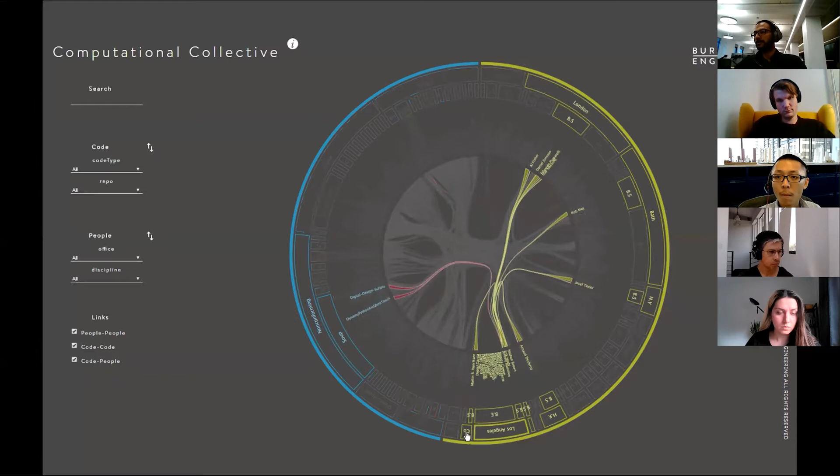So a bit of proof of concept here of connecting everyone to everything. On the right side, you'll see individuals who have contributed code to BHoM. Those are within Buro Happold and also outside of Buro Happold. And on the left side in blue, you'll see the packages of code that they've contributed to through our toolkits. So it really is a kind of nebulous form of individuals contributing to code back and forth.

Our code development metrics, this is a little bit out of date. We had 81 contributors to our open source code, which is a bit unprecedented, 120 repositories, and over 500,000 lines of code in total. I know this number has gone up significantly since then, but just a little bit of a peek into how collaborative BHoM is.

And a bit of foundational concepts here to cover. It's BHoM, so of course there's an object model behind this. So we have got discipline representations of those objects. We also have our adapters, of course, connecting different software packages together, and the engine, what you do with those objects. So a bit of how we've structured our oM.

It's defining the elements we use every day on our projects in the way that we as the experts understand them. I know a duct very well because I'm a mechanical engineer. I would have no business defining a beam. However, there are concepts that relate between the two of them, such as that you would have a start node and an end node, and maybe a center or radius, something like that.

So here we've got a circle, which would be defined with a centre. Please do not mind the British spelling here. You'll see it all over the code in BHoM. So we've got the centre, the normal, and the radius. You, of course, have a radius and not a diameter because you're defining it by a single property, not ones that conflict with each other. And all of the derived properties, something like a diameter, would come in the engine method. So we've decoupled those two.

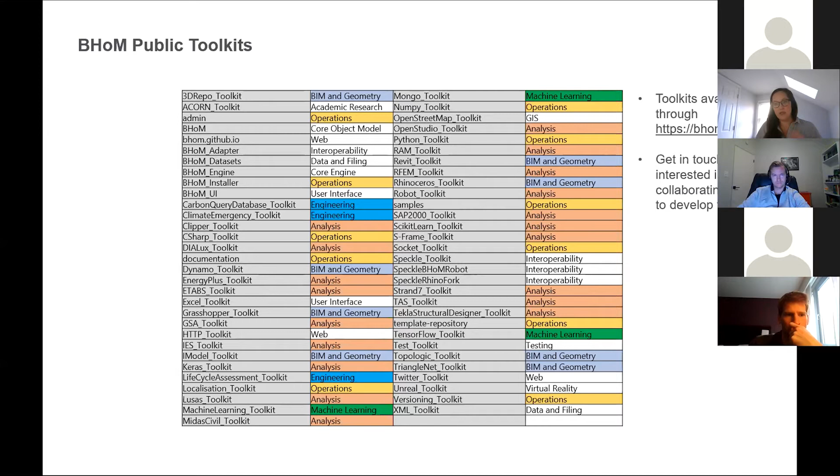We also have some closed source toolkits. Those are things we either just use internally or don't think are that important for external use. However, we're always open to moving those across. So if there's something you see that's interesting, let us know.

Here we've got our different packages. We've got 36 open source adapters to different software packages. You can see them all laid out here. So everything from Revit, Rhino, Twitter even to data mine there. LUSAS, which is used for bridges, lots of structural adapters here, Energy Plus, IES, TAS, all that good stuff.

So BHoM loves flow-based or visual programming. All of our user interface has been taken from the software that we already use to do visual programming. That's a nice way to interact with the code that's been built. So once you write a function within BHoM, it automatically appears within Grasshopper, Excel, and Dynamo. You might be asking why Excel? Lots of people love Excel, and we believe in using the right tool for the right job.

So if you look within Excel, it's better for more like data operations, and we'll see that through the demos here. But of course, Grasshopper and Dynamo being the flavor that we love within AEC for visual programming. So you'll see that everything has a lot of parity between the three interfaces. You can see here exactly what they look like within each of those three interfaces. We are open to expanding this to other interfaces if something comes up. Again, it would just be another toolkit.

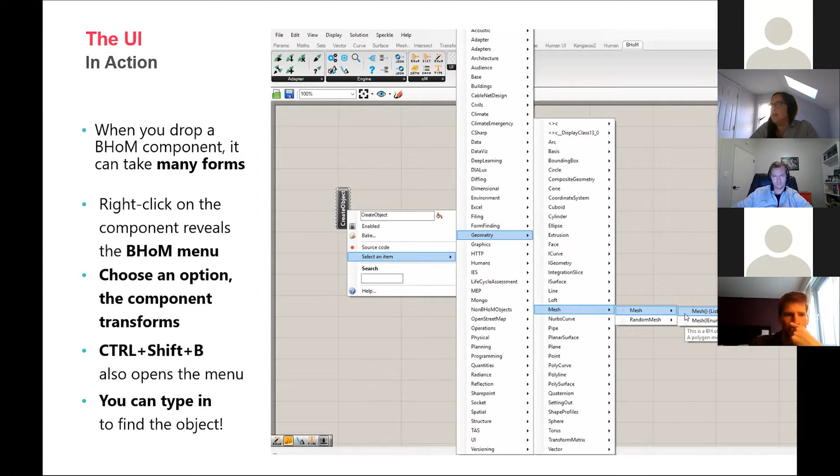You can select a specific geometry representation here. In this case, we would select a mesh. We see that the component pops up here. However, you can also go through and just search for a component by name. You can also hit Control-Shift-B, and that allows you to search for anything within BHoM. So that's another quick tip there.

So Eric's going to be going through some examples of how we have utilized BHoM. Thanks, Kayleigh. So just touching on a few ways that we use this in our workflows and how this affects the way that we describe objects and send objects to and from each other. The first example we're looking at here is a pretty standardized workflow that we're using now on quite a few projects, looking at transdisciplinary design and what we call rapid prototyping. We're literally looking at how we rebrand this, because we feel like that's not really the best phrase for it. So hopefully next time you see something like this, we'll have a zingier sounding word to describe it.

But essentially, this is something that a lot of people in the AEC industry have been looking at, which is early on when we have something like a massing, how do we efficiently derive all the different bits and pieces that that massing leads to for each different discipline? It's pretty typical in our industry, we'll see Grasshopper scripts to take a massing and do X, Y, and Z in order to get windows out for facades or to get the mechanical routing for some kind of early calculations. Maybe you're going into Ladybug for those calculations.

And rapid prototyping is how we use the BHoM to define all these things in a common framework where once we have that massing, we know that we can describe the building in all those different ways that the diagram Kayleigh showed in the beginning is starting to touch on. And by doing that, we're able to really quickly connect all the different disciplines to their source of truth, feed those through analysis, and then really quickly get answers back. So this means at early stage, we can get a wide range of designs and get good information on the key metrics for those designs for all the different disciplines involved.

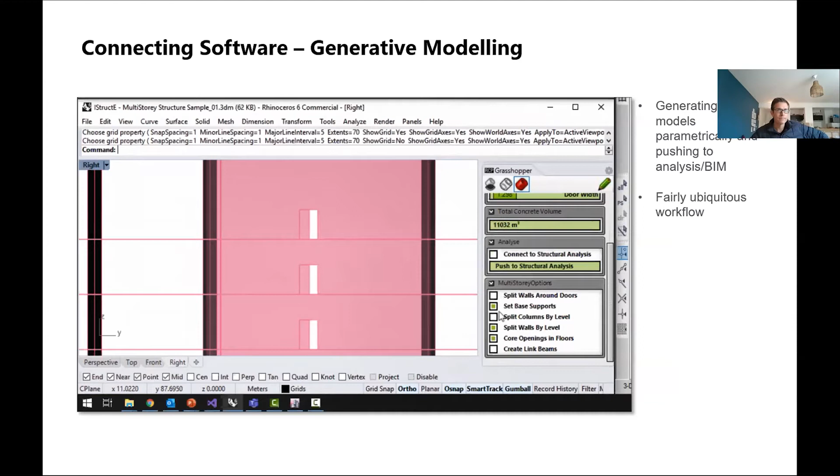Another option that we use the BHoM quite a bit for, and that I think most people get a lot of value out of, is looking at things like generative modeling. So if we need to create geometry, being able to create geometry from our primitive information into proper BHoM information. These are data-rich objects. These aren't just flat geometry. So these data-rich objects then can be sent between different platforms that depend on that data.

They also can be sent between the analysis into something like Revit with all that data still maintained, that obviously then feeds into things like documentation. It's just a really handy way for us to generate geometry with data that's critical to our workflows and that we can send between different software that depends on that data.

And then expanding on that, here you can see a similar example to the last video, but with Excel. So simplifying workflows to be able to cater to different processes on different projects. In this case, using Excel to just enter in some key coordinates and quickly prototype out a multi-story building layout. So the one shown here is just a demo, but this is a really handy tool to have when you're early on with an architect and you want to explore different solutions.

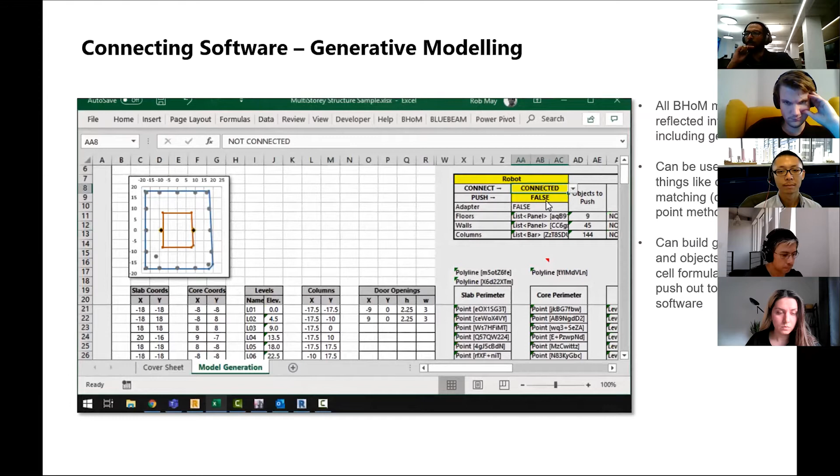And maybe it's not even just a matter of they're giving you a bunch of different masses. You're having more of a dialogue of laying out the structure and the general massing in order to understand how that relates to structural performance, member sizes, things like that. So you can see in this example here, we're starting with just a few points that are entered into Excel, and from there generating all of our slabs, our typical shear wall layouts, running that through analysis, and then that can be fed to whatever analysis platform we prefer, and can also then be sent to somewhere like Revit.

I think the key thing here too with the BHoM is we're not tied to specific platforms. So we found, especially being a global practice with a lot of different regions, with a lot of different codes that they're required to design to, a lot of different software that's either kind of blackballed in certain areas or really preferred in certain areas. This flexibility to say we have the same model description and we can then just send it to whichever analysis we prefer and get the same consistent result out is really powerful for us.

So, if we need to use ETABS, we can use ETABS. If we need to use Robot, we can use Robot. And we're not going through the process of tweaking a bunch of information to make it Robot ready. Since it's described in the BHoM and the adapters handle those conversions in a consistent manner, we can consistently create that same analysis model in whichever platform we prefer.

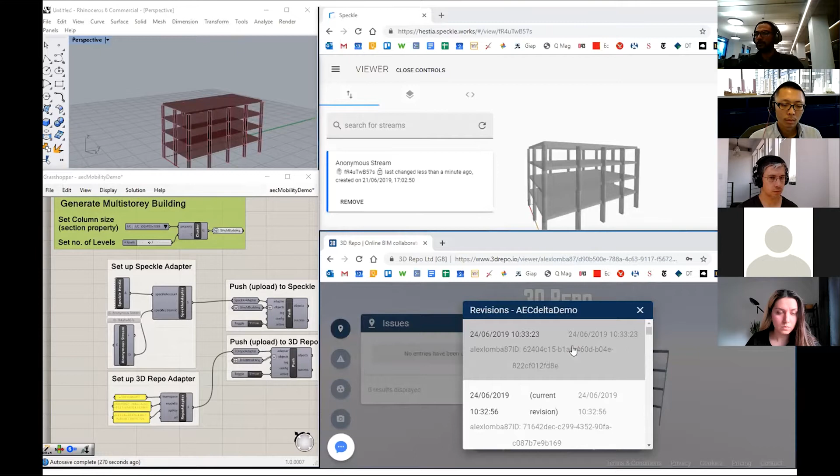We're also now looking at how we leverage web-based platforms more going forward. So among other things, we're working now on support for Blazor and direct integration between Blazor and the BHoM code base, which is also in C#. So really exciting development as far as getting us closer to direct web-based development. We're not really sure where that'll lead yet, but the fact that we can have our native BHoM objects described in a web-friendly platform that's ready to deploy, we think there's a lot of potential there. So we're really excited to see what comes out of that as well.

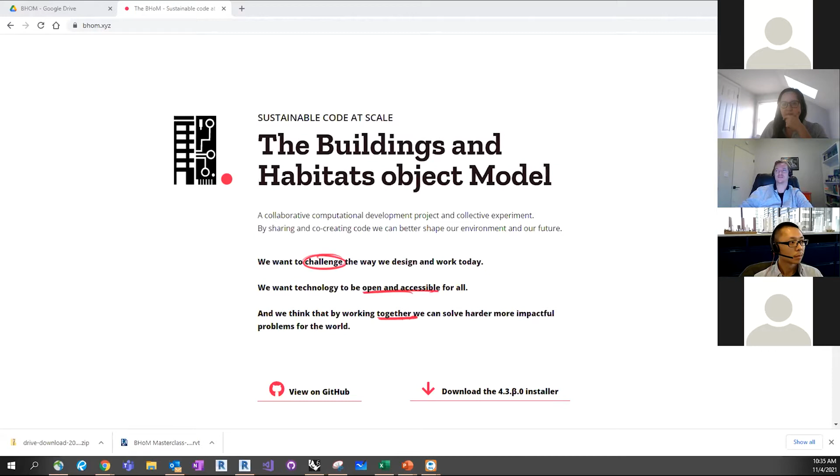So when you install this, it'll plug into Rhino and Revit. So just download the installer, get that installed, and then download all of the files in the Google Drive. That includes your scripts, so you'll see a few Grasshopper files, a couple Excel files, which have the script logic contained within them for reading in BHoM objects and doing things with them. And then some base files as well, so you'll see a base Revit model, Revit version 2020, by the way, that we can use for testing pushing objects to Revit, and we're going to be using that for the room interop as well.

With that, it looks like Kayleigh's back, so Kayleigh, back to you. Hey, I could hear you the whole time.

Thanks for picking up. So in terms of following along, does everyone feel a little bit more comfortable with that?

Yeah, I think I'm going to try following along, at least initially. Cool. Quick question on the Revit version there, Eric or Kayleigh. You said Revit 2020, and I do have that version, but I'm wondering with really subtle differences in the APIs and stuff, does it auto-detect what version Revit file it's connected to, depending on the plugins, I'm guessing? Or I'm just curious.

So we've set it up so that we have specific deployables for each Revit version. So it's fully supported for, I believe, 2018 through 22 at the moment. But essentially you don't have to worry about which version you're pushing to. Revit Toolkit will take care of that. So no matter what, if you're pushing to 2019 or 2021, that doesn't change your script at all. It doesn't change anything about what you're doing.

When you do the push, if you're connecting to a 2019 version, it'll push to 2019. If you're doing 21, it'll connect to 21. Each of those DLLs are essentially referring to the specific API of that version. Perfect, sounds good. Yeah. You won't notice any changes based on using a different Revit version. It all looks the same. But the adapter was just updated to support 2022 as well. Perfect.

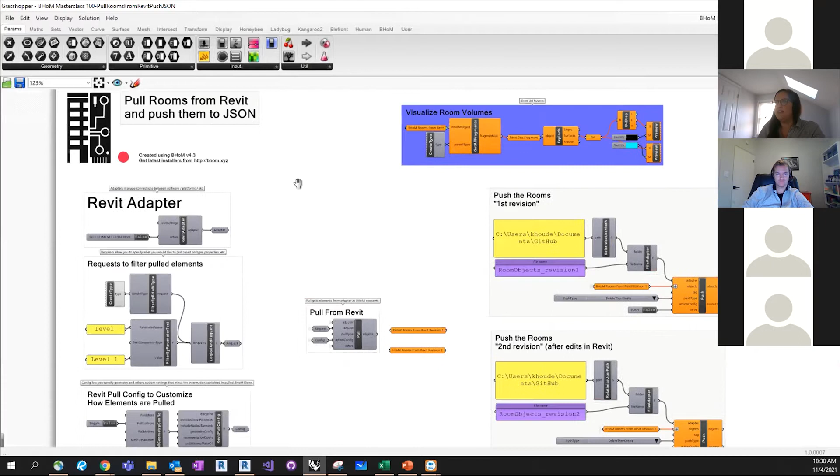So you can see here that we've got our little heading here to pull rooms from Revit, push them to JSON. It's created using BHoM version 4.3, which all of you should have downloaded from the BHoM.xyz site. We can see first thing on the page here is that we've got our Revit adapter set up. That's where we're going to be pulling from. So of course, that's where we start off.

You can see that there is a Revit settings portion. You can set this up to look however you want. There are different discipline orientations for that if you needed to use it. I hardly ever use that function. Mostly just telling that specific adapter, which comes from up here. So if you go to this little plug button for create adapter, you'd be able to pull that down.

Right click, just like you did in all the other videos, select an item. You can see all of the open source adapters to different software packages here. You can come over to Revit adapter and place that component down. We already did that for you ahead of time. So I'm going to delete that component.

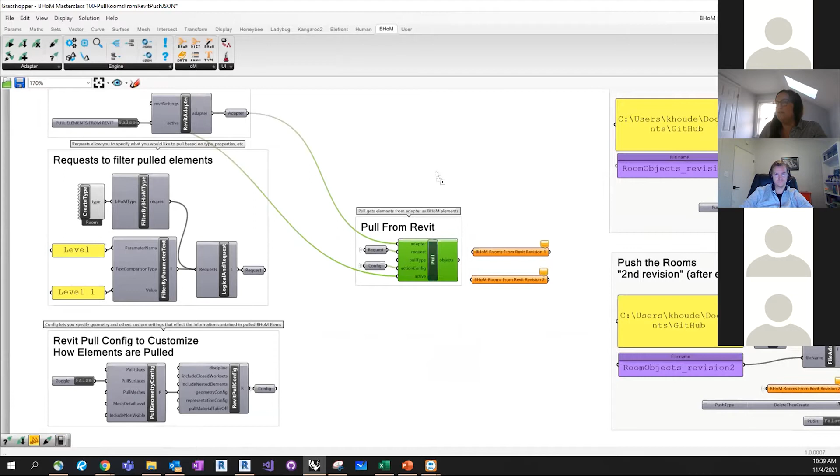We can see that if we're looking at the pull, which is this component up here under the adapter with the little arrow, this pull component is saying which adapter are you using, which software are you pulling from. Request meaning what are you trying to pull. The pull type can be specified again for that specific thing. Action configs are used for different adapters as well. There are some that are specific to different adapters. And then active, should I be pulling or not?

So we'll see that that's already set up here. We've got our adapter plugged in from Revit. You'll see lots of these little repeater things if you're not a frequent Grasshopper user. If you just double click and you type in BHoM object, you'll see that those pop up here. We like to use these little containers for internalizing objects so that we can pass scripts between each other without having to reopen Revit or SAP or wherever you're getting objects from.

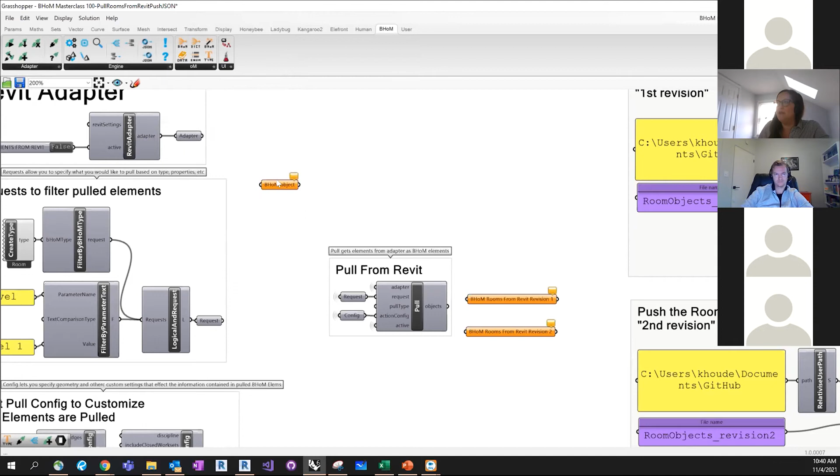So you'll see lots of those floating around on the page. Also just a workflow of keeping your script really tidy. It's always easier to work together if you're being clean. So the specific request that we're doing here is over in this area. In this case, we're telling it to pull all of the room objects, so filter by BHoM type, as well as the level that they should be coming from.

You don't have to set it up this specifically, but this is just showing that you can use logical and types of requests to pull only specific items rather than eating the elephant of 5,000 rooms within your project. You can break it down a little bit. You can also filter by selection, so just selecting a couple of things. You can also just go ahead and plug this type right in here to the request.

So types are probably the easiest way to work with in BHoM. So you could just plug that in there, but we'll keep it as it is here for now. So you see that request is set up there. There is no pull type specified for this, which is perfectly fine. You don't have to have that. We did set a pull config option.

So these are kind of neat because they allow you to have different permutations of visibility of things. So you can choose a specific discipline permutation of that, including closed worksets, including nested elements. You can also look at the geometry in different ways if you want to. So you can pull edges, surfaces, meshes, anything you really want. It supports lots of the different objects within Revit. So that will allow those to be visible within Rhino.

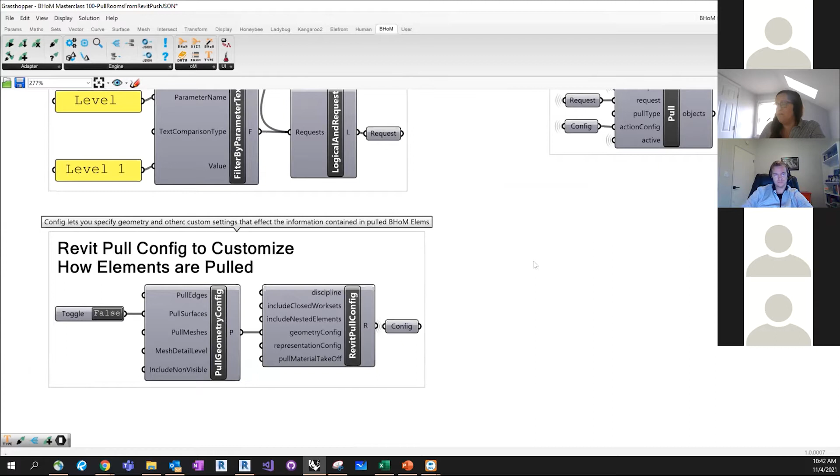If you didn't set this, you'd be able to see like the perimeters of the rooms. However, pulling surfaces lets you see the whole thing in 3D in the Rhino space, not the Revit space. So we see that that config is set up. And then last but not least, the active component, which allows us to pull those objects here. So without further ado, we are going to just go ahead and pull those objects. I'm going to set this from false to true. And this is using the Boolean toggle function within Grasshopper.

All right, so what is it saying to me? It is saying, failed to connect to Revit. Whoops, Kayleigh forgot the first step here. If you go over to BHoM within Revit, you need to activate it. So I did that on purpose, obviously. So I'm going to go to the BHoM tab in my Revit screen here and click Activate.

Since we are all sadists and love having tons of different Revit versions open, you have the option of updating ports here. If you have 10 versions of Revit open, which probably drives your IT department nuts with licenses, you can set the ports on here. If you just have one version open, or just one that's active, don't worry about it. But if you're pulling and pushing between different Revit models, you can set ports on them. So don't worry about that right now, since these are the default port numbers.

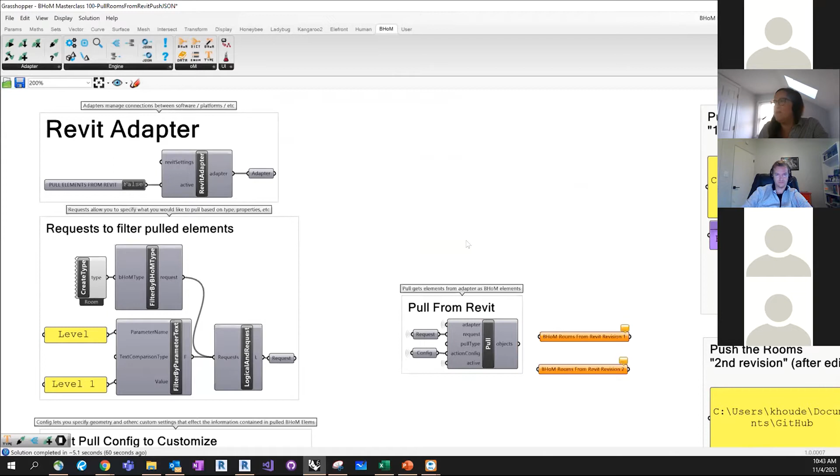So here we've got that activated now. I'm just going to set that back to false and then true, and it should pull my Revit rooms across. Whoops, I forgot to change it. Any questions on pulling? All right. Mine still says failed. Just change it from false to true again. Okay. And let me know if it still has issues.

Got it. Cool. Perfect. All right, so we see on the result side of the pull, if you hover over the objects, we see that we've got 18 objects. These are all defined as, I'm going to put a little panel here so we can see them, BH.oM.Architecture.Elements.Room. That's because that's the type that we set up over here. So that is the way that BHoM is viewing those rooms as it pulled it.

You could also pull them as environment spaces if you wanted to. Those have an interchangeable language, but a disciplinary spin on the way the object was defined. So the default here is the architecture elements room. So we see we've got a couple of little containers sitting here. This is the one that I'm going to drop these room objects into. So I'm going to grab from the objects on the pull and drop that into the BHoM rooms from Revit revision 1.

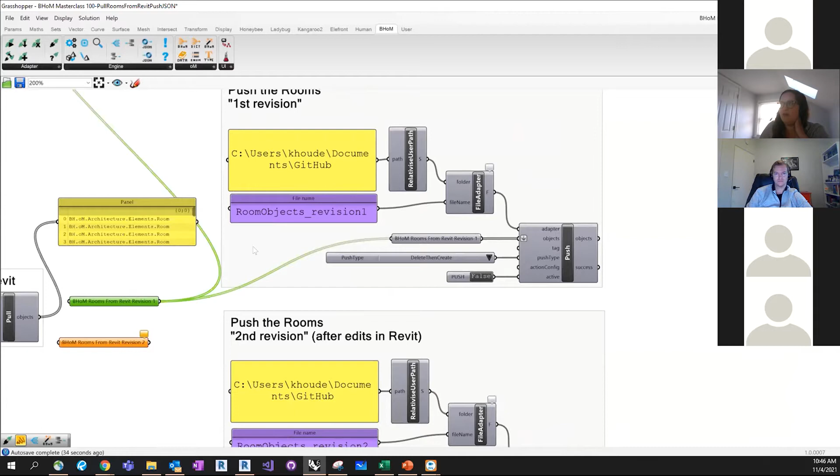So now that I've got these in here, I can also use my handy dandy internalize function and actually keep them inside of the Grasshopper script if I wanted to, so you never have to open up this Revit model again. You can right click and internalize data. It's a nice way to pass scripts between people, so you don't have to open up every model. So we've got those sitting inside of this little container now. We see that those are connected over here to our file adapter push, which is going to push that JSON file across. Do we have any questions before we explore the push?

So essentially, this is just pulling data and then turning them into JSON. This part of the workflow is, yeah.

Got it. So the overall workflow, if we go back to our diagram here, is that we're going to make some changes to these rooms. We're going to change some data about them. We're going to change some geometry. And then we're going to use our diffing engine to figure out what those differences are.

Eric's actually going to pick those up and modify his roof structure as a result later. But within this workflow, we're just going to show how you can push those JSONs along and keep track of your different permutations of a model. So a workflow we really try to get into at BH is keeping track of your different files.

So if you want to say the architect gave me a model on day 1, and then they gave me a model on day 30, and I haven't updated my spaces since then, and I only want to update the ones that have changed, how do I know what to look at? So this allows you to basically diff or find the differences between those different models and look at the data that's changed, look at the geometry that's changed, and then you can decide how to move forward with that.

Another workflow we use this for is our electrical engineers love chasing the mechanical people around for the loads on their mechanical equipment. And they usually get stuck with doing that 2 weeks before the deadline. So they'll say, okay, I did this 2 months ago. I want to know where to look very specifically to see what has changed. So you grab the mechanical equipment from 2 months ago, grab it from today, and you can see the differences.

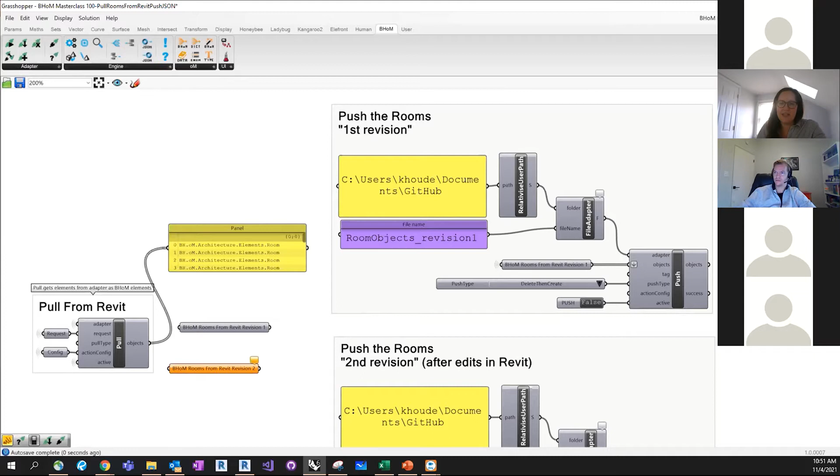Looks very similar to the, is my internet cutting out again, Eric? Can you hear me? Yeah, it did for a second there, but you're good now. Sorry. If it happens again, we might maybe just stop doing your video, but for now, I think you're good. Fair.

Okay, so the push looks very similar to the pull. You're telling things where to go. So first the adapter, then the objects that you want to push. So dissimilar from requesting what to pull, you're telling it what to push with the objects. Then the tag for those objects, if you needed it. A push type is usually a pretty fundamental thing to do. So when you're pushing to Revit, you usually want to do update only.

You can see here that it's the usual kind of CRUD language of creating, updating, deleting. For JSONs, delete and then create is usually the default behavior. You don't want to keep rewriting over those objects that you're pushing. You usually want to just delete then create for a particular file name. And then the active again, in this case setting it to false, so we're not just automatically pushing that JSON.

So for the adapter here, we see that we've got the file adapter. So this is the magic sauce for pushing JSONs within BHoM. You've got the folder path here. So I just have a little panel here describing my GitHub folder where I was pushing these JSONs to. So feel free to, well, or you have to actually, paste your own link there. So any kind of file you have within

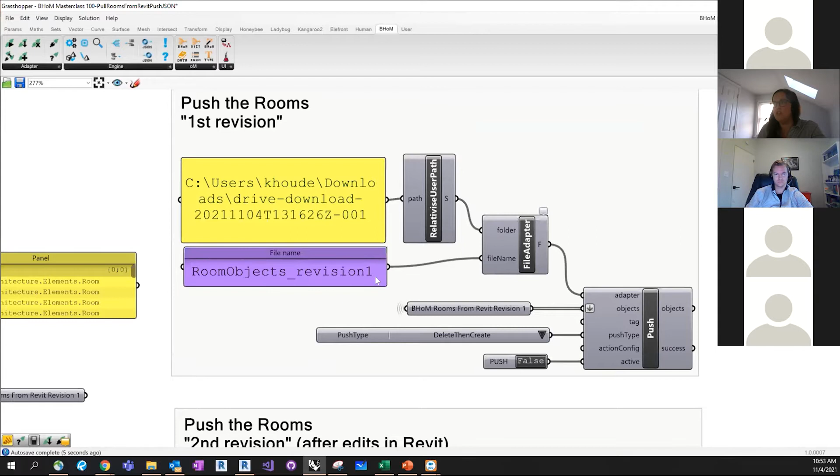Cool. It's all clear. So if we're feeling good about this, we can go ahead and change this to true, and then we should change it back to false so that it remains closed. You'll learn pretty quickly to keep those shut off until you need them, or else you'll keep pushing and pulling things. Live updating, it's kind of like using automatic mode in Dynamo.

So if I go back over to that folder, I see that I've got my room objects underscore revision 1 JSON file sitting there now. So those are actually room BHoM objects that we have pushed along. So the BHoM architecture elements room objects. All right, any questions before we move on to an Excel-based workflow?

My script is not visualizing rooms in Rhino. And so this get all fragments component is not passing anything through, at least for me. I don't know if there's something I should change. So it might be, is it your red mode, green mode? No, so Kayleigh, that's because of the pull surfaces. Mm-hmm. So Kayleigh, if you go full screen here on Grasshopper. Yep. And go up to your fragments.

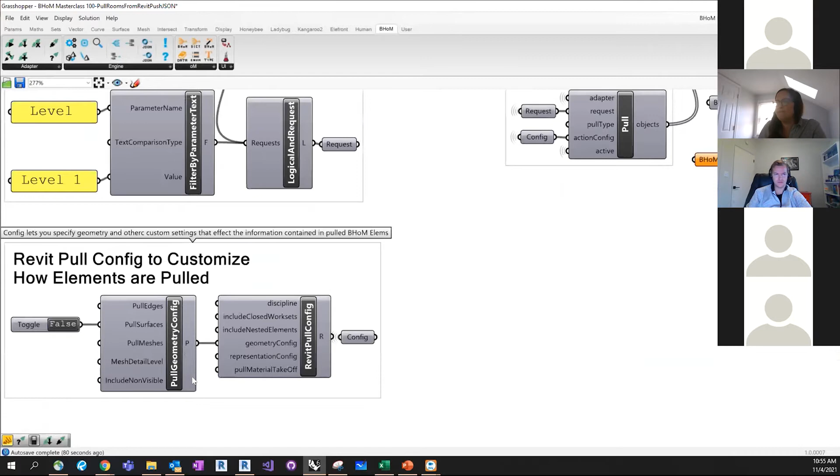I would suspect you actually are getting fragments. Are those coming from the? Let me change this for everyone here. This was set to false by default. Yeah, exactly. That's where we're going eventually. So this is a good illustration of the pull config. In this case, the pull config, when pull surfaces is set to false, is saying don't pull over the surfaces. But then that visualization was basically saying grab the fragment that corresponds to the Revit surfaces that have been pulled. Mm-hmm.

So it was going red just because that was set to false. So the fragment essentially wasn't being found, so then nothing was being shown. Okay, now it's working. Thanks.

Cool. Yeah. And that's something we use quite a lot actually, is the ability to really refine what we're pulling from Revit geometrically. We want to pull things as standardized objects, but sometimes Revit obviously tends to be what everyone's looking at geometrically, what everyone's modeling to. So it lets us pull, if we have, for example, a really gnarly nested window family for a facade, rather than just pull that as our default facade object, it gives us flexibility to pull all that geometry too, and then to do manipulations of that geometry as required downstream.

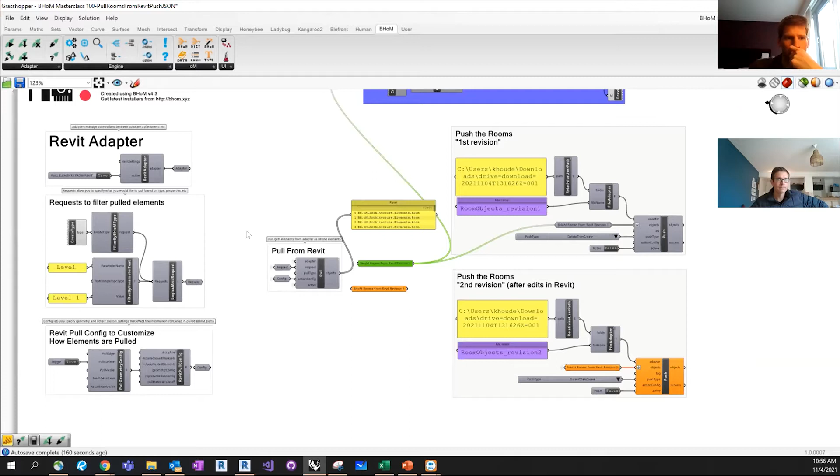So just really a handy tool to use if you're doing Revit-based workflows, is the geometry part of the pull config, being able to refine that. Yeah, it's interesting. I didn't get an error. I did not know that was a toggle there, but after turning it to true, I do see the surfaces in Rhino now. Perfect.

All right. Sorry. When I toggled the push to true, I'm not getting anything showing up in my folder. So I reset the link to a folder on my desktop like you did, but I'm not seeing anything. Any suggestions for where to look? Did you pull your objects into this container here first? Yes. No. Thanks. That'll do it. It's because I internalized it, it wasn't showing the exact wire when I was doing it, so I could always open that back up and pull that like that.

Oh, actually, sorry, it wasn't that. I've now pulled it over and it's still not showing up when I toggle the true back and forth. Okay, so you've got your objects going from here into here. Yep. Your adapter set up properly. You have a full file path. Yes. Okay. And then delete, then create. And then this is going from false to true. Yep. Do you maybe want to screen share? I don't know if that's possible.

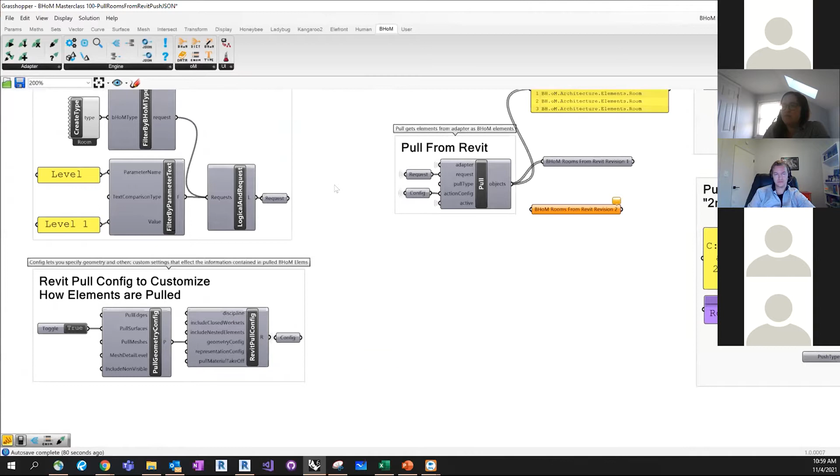Thanks. Quick question. Sorry, I missed the whole visualizing surfaces portion of this. I'm not seeing anything in my Rhino. So if you come over here. Right. I had it set to true. And then you're going to re-pull. So you're going to go false to true up here. I see. And then you should be good.

Let me see. I think we specifically didn't want to, Eric, because we were getting the fragments piece yesterday. You'll see that this will come through on the diff when you do that by the fragments, but it's okay. We'll do it with both so that you'll see it both times. Because the surfaces are then a part of that object as they come through, which is kind of interesting. Vincent, were you able to see them this time? I think so. Yeah, so we see those pop up back here.

I'm only seeing a bunch of lines. That's probably that you're pulling the perimeters of the rooms then rather than the surfaces. Yeah, so I think I had to redo the false true twice up here to get these to come through. So just try this again on the active and you should be able to get these to pop up.

What's the reason to sort of toggle back and forth true false? Is it just calling whatever function that it's underneath to run again? Yeah, exactly. So if you change a config setting and you don't have the adapter set to run, then you just want to rerun it then. Got it.

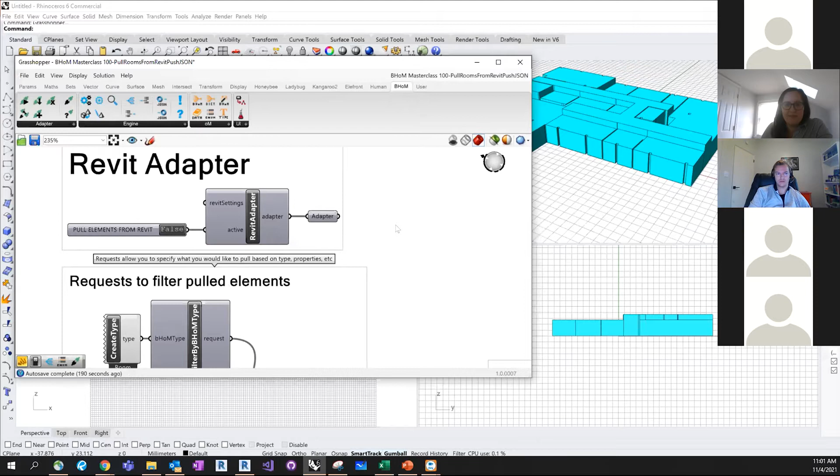Did that work? No, but it's okay. I can try to troubleshoot later. Yeah, it's just pulling all of the outlines, but none of the surfaces. That's okay. If we're running out of time, we can move on. Yeah, if we want to go back to it at the end, we could do that. Sure. Cool. If it helps in debugging, my pull edges only does not work, but my pull surfaces does work.

So with the pull edges, would you expect just to see edges and not the entire surface, right? Yeah. So I'm seeing the opposite of what the other person is saying. So my pull surfaces do work, but my pull edges for some reason don't want to come in when I toggle. Just a side note. We can continue. Sorry.

Good to note that. Kayleigh, if you just plug the true into pull edges here, yeah. And then take out the pull surfaces. I took out the pull surfaces. No, Kayleigh, change it to true. Your Revit adapter, just leave it to true. So we're connected, yeah. And then get rid of pull surfaces. Leave it true, leave it true. And then let's go up top.

So I just want to highlight why this is happening. Kayleigh, if you go up to the top. So where we're visualizing, in this case, we're saying get all fragments, and then we're getting the surfaces. So if we hover over edges there, yeah, just hover over it. So now that we're getting edges, you would just need to update what you're plugging in, because essentially what we're getting is a fragment with all of that geometry. So it contains meshes, surface, and edges, any option of those based on the config that you set. So here you would just need to update it to visualize those edges instead of the surfaces.

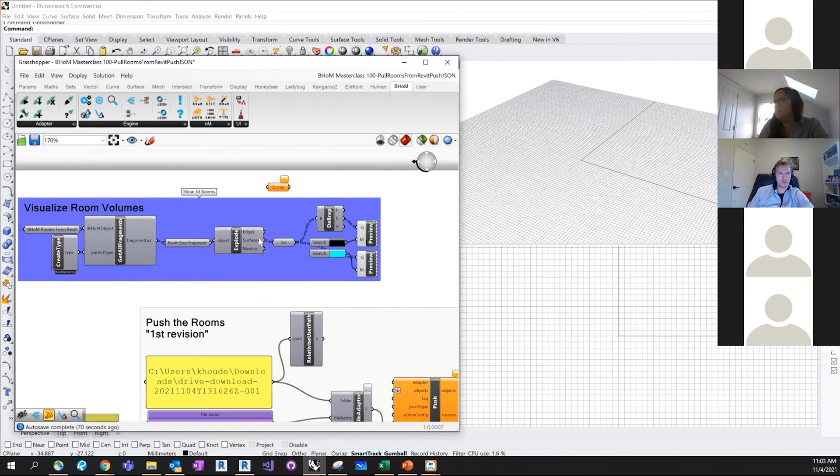Yep, makes complete sense. Kayleigh, if you plug that into a curve component real quick, just so we can see it. Yeah, and the edges, there we go. So now we can see that by changing the config, we're just getting the edges of elements. Sometimes this is useful if we're trying to just extract certain floor information or things where we don't necessarily need the surfaces. Using the different levels of geometry config and definition helps us keep files light so that we're only keeping the information that we need, but also lets us access any of that geometry if we do need it.

Sorry, Kayleigh, back to you. No, you're good. Vincent, any luck on your end in getting them across? I wasn't seeing anything at all, and then I just turned on the preview of the pull from Revit. That's what enables me to see the edges. But then I tried it again by turning on the preview without using your preview materials, and then somehow Rhino crashed. So restarting. That's okay. It happens. All right, we will trudge on then.

All right, so back to the workflow diagram. We've managed to pull the original file and push the JSON here. The next thing we're going to do is the 101 script for BHoM in Excel. So if I go to my downloads folder here, it is the 101 file. Go ahead and open that up in Excel. Okay, so we see that we have a blank sheet here with all those bits filled in to some extent. We're going to see some little oddities here. This was filled in initially with the adapter, the request, and the pull. Since I'm using a different installer, these defaulted a little bit, but the same interface appears here with the engine, the adapter, and the OM.

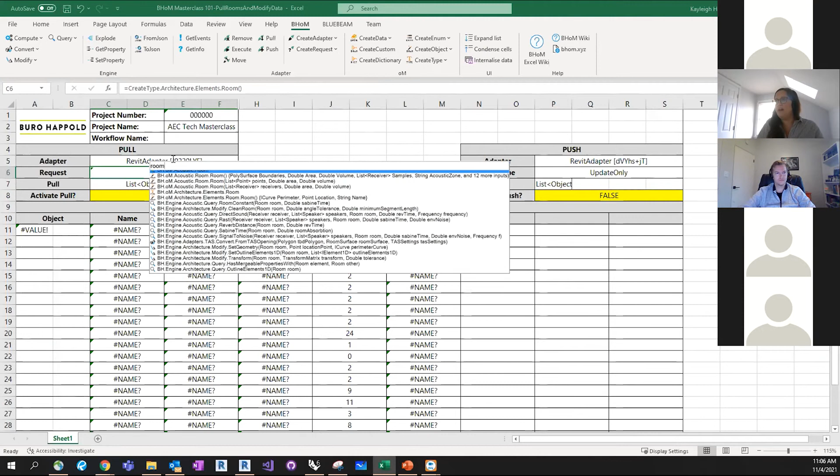I'm going to change this to false just to be safe with my workflow here on both of these. The request that we're going to set is again a room type object. In this case, we're just going to do the really quick version of it. So Control-Shift-B works exactly the same inside of Excel. So if you Control-Shift-B and I look for room, I'm going to see that this little T for type with the BHoM architecture elements room is the one that we want.

So if I just hit enter, I should now see that my pull is set up exactly the same way that it would be in Grasshopper land, with first being the adapter that you put in, second being the request that you put in, third being the pull type, action config, and then the active here. So now that that's all set up, close the parentheses, hit enter. I'm going to change that activate pull to being true. And we see that our room objects magically appeared over here.

This is taking this actual list of objects and expanding it down this side. So you can do that through a query reflection list, or you can do the expand list up here to get these different objects to appear down the side. So we see that we've got all of our room objects over here. Now what we're going to be doing is getting the properties out of those rooms.

So you can imagine that using Excel would be very handy for someone who wanted to take a look at your Revit objects, maybe who doesn't love Revit. If they want to modify like a schedule or something, you can pull them into this interface and then push them back out with the modified data. Lots of good uses for Excel, mostly data. Eric's example of creating a model in there, probably not the best use for creating something in Excel, but you can. Doesn't mean you should.

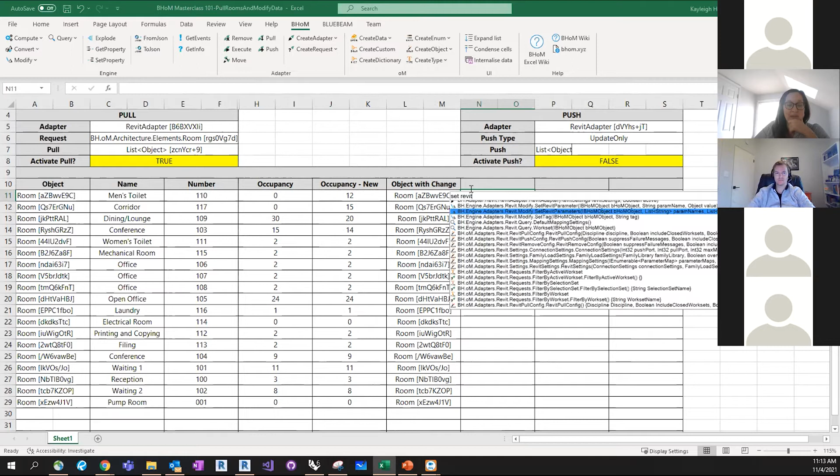A quick question. Could I change multiple parameters at the same time? Yeah, so when we did that Control-Shift-B for set Revit parameter again, you'll see that there is a list option here for the list of parameter names and then a list of values. Usually what we do is take the values from something like IES and push all that data into our Revit spaces. That requires a long list of parameters, a long list of values. So this is a nice little function for manipulating lots of data at the same time. Perfect. Thank you.

All right. So now, any other questions before we go ahead and push these back to Revit? Cool. All right. So now we'll see that the push is set up the same way that it was in Grasshopper, but it's just through Excel this time. So we've got our push component here, which you can grab from right here. And it is set up to have the adapter, the list of objects that it's taking in right here. We skipped over the tag portion here. We've got the push type. In this case, update only.

Very, very important. The default that you would have there sometimes is delete then create. I think it might be update only in Revit Adapter specifically, but I always want to make sure that you set that, because you'll be really surprised when you delete everything and recreate it. So you may not want to do that. In this case, it's a drop-down in Excel as well, same thing that you would see inside of Grasshopper. And then we've got our action config, active, and then including output names, some other little bits that are in the Excel push. So that push, once we activate it, should actually make that change in Revit.

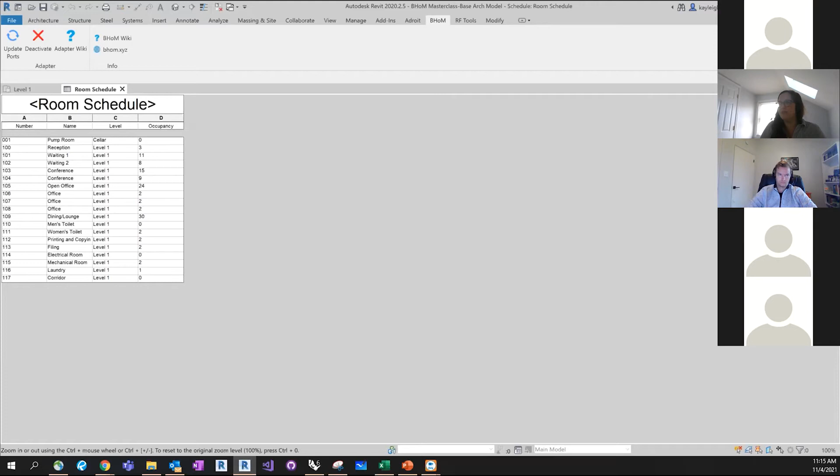What we will do to make that look a little real over here is we're going to open up a Revit schedule, and we should see these numbers modify when we push them through. So I'm going to make this a little bit smaller so that we can see over here. If I change this to true, we should see specifically, what was this first room? Men's toilet occupancy should be 12. This one should change to 12. All right.

There we go. So we had our updates to Revit properties happen over in Revit land. If you didn't like that that happened, you can always undo the fact that the BHoM push happened over here. Same way as running any other script, you have that capability. Any questions about Excel stuff?

For the sake of a metric here, about 20% of BHoM UI triggers are in Excel. So Grasshopper is by far the preferred interface, Dynamo falling way behind with like 2%. I think using Grasshopper, we all probably in this room know that that's a bit better for a geometrical operation. So that tends to be our heaviest UI within BHoM.

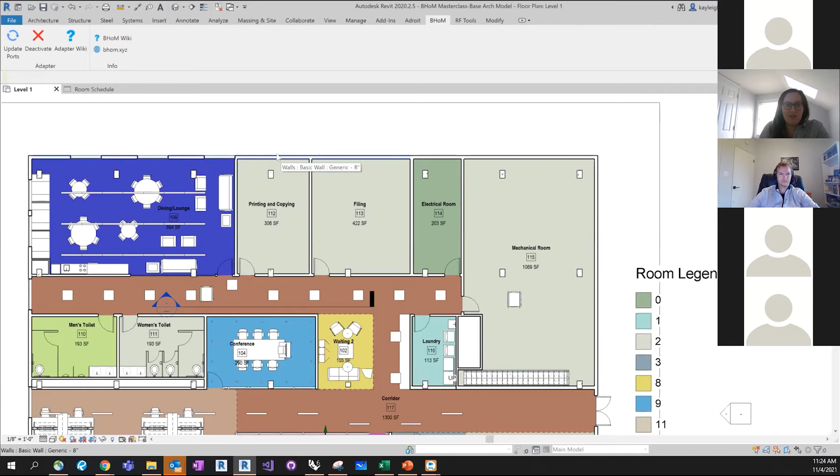All right, so back in Revit land, we're going to take this wall and shove it up a little bit just to make a geometry change to make Eric's life nice and difficult for later. So we'll shift some geometry in here too, so that we get the diff across both geometry and data. We're going to go back to our first Grasshopper script, the 100 script that we had open over here. I'm going to set that to false so that I'm not pulling any of those edges again. I've got this guy set to false, so we're all good. We're going to pull those Revit rooms again, but this time put them to a different JSON file so that we can diff between the original set of Revit model rooms and the second set with the geometry shifts and the data shifts.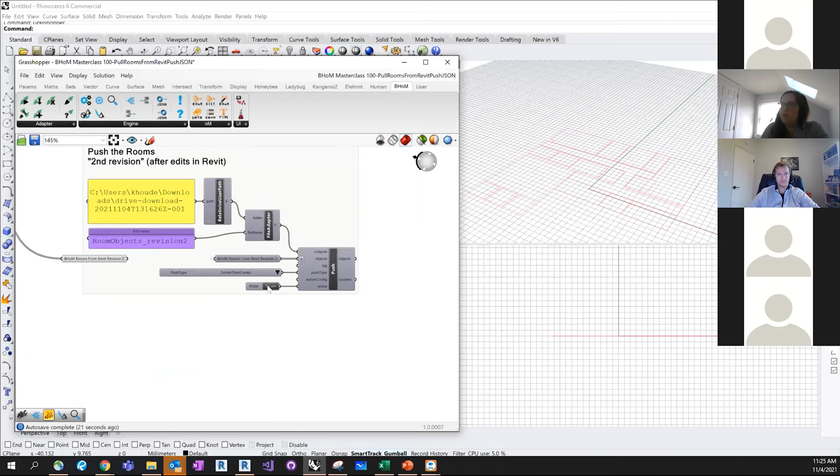So here I'm going to set this from false to true. We see that we've got our 18 objects again. I'm going to push those down here to this container. That container is now connected over here and should be pushing to this JSON file name. I have the same path up here. So if I change this from false to true, we should see that those push into a JSON file. So now if I go to my downloads folder, I've got revision 2 in there as well. I think I pulled edges in my first one because this file is a little bit bigger. So we're going to see that that's a part of the diff.

It's okay. So now that we've got our 2 files, we've done these 4 bits. We're going to move on to the point where we're doing diffing in Grasshopper, and we're also going to do it in Excel so that you can see the 2. I did not name these in the right order. We're going to start in Grasshopper just so you can see the component, because it's obviously easier than flying blind in Excel. So we open up script 103 in Grasshopper, 103 diff rooms. We'll get that open in Grasshopper.

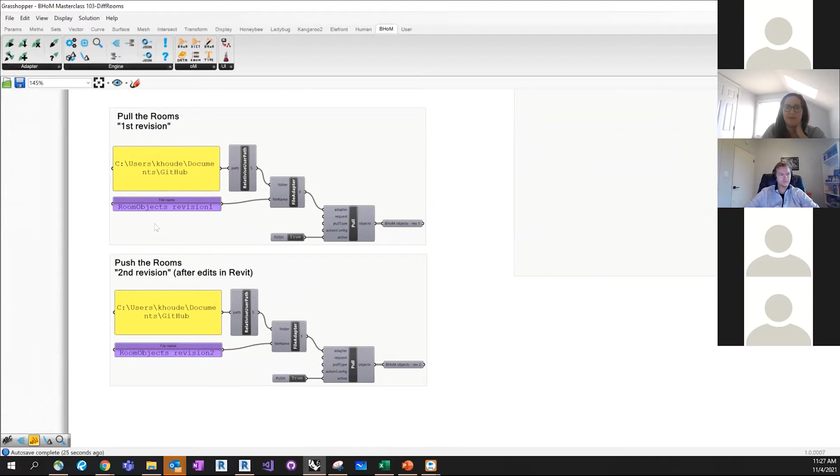All right, this fun script we got set up here. So this first bit up here is showing that you could pull directly from Revit if you wanted to. Like let's say that live version of the model is today's version of the model, your current objects. You could do that. The other option is just to pull those directly from your file adapter from the JSON files, which is how we've got it set up here. But we left that up there for agility in your own workflows after this.

So that first bit that we're going to do is I'm going to change my file path here. And this time we're pulling from file adapter. Oh, whoops. Just gotta set those to false. And set that one here. So we see that we've got our pull from file adapter. Nothing else required here, just the adapter and the active.

How great is that? So for the file adapter, we've got the folder, the file name. Make sure that you've named these the same things here so it knows what it's pulling. And then it will be set to true here to pull those objects across. Cool, I've got 18 rooms. Again, 18 rooms here. Got a little container here. Popping those up to this object. Same thing with this one.

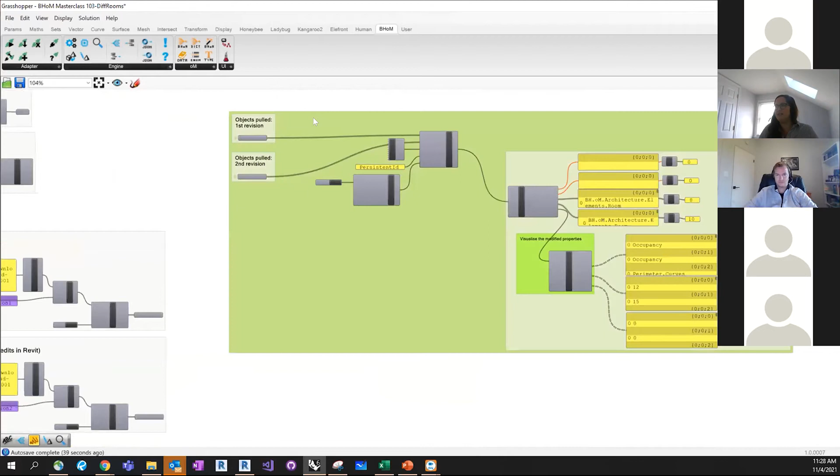So this is one of the more fun engine methods that we've created. This was a UK grant, a project between Speckle, 3D Repo and BHoM to basically limit the amount of data that we're passing. If you think about the fact that we exchange these gigantic Revit models on a daily basis across the whole world, really what we should be passing is the changes, the delta between them. So that's how the diffing engine was created.

So what this engine method for a diff is asking you is, what are your past objects? What are your current objects? What is the fragment type that you're looking at? In this case, it's Revit identifiers. The fragment ID property, persistent ID, element ID also works here. Unique ID is one that's being implemented for this as well. You can also set up a unique hash if you want to get fancy and just diff specific stuff.

And then there's also a config where you can do different kind of permutations of what exactly you're looking at in terms of changes. Sometimes you just might want to look at data. Other times maybe you just want to look at geometry or location. So it leaves it pretty open-ended in terms of what you can diff. So in this case, what we're doing is we're passing along that first set of Revit objects, a second set of Revit objects here, our fragment type.

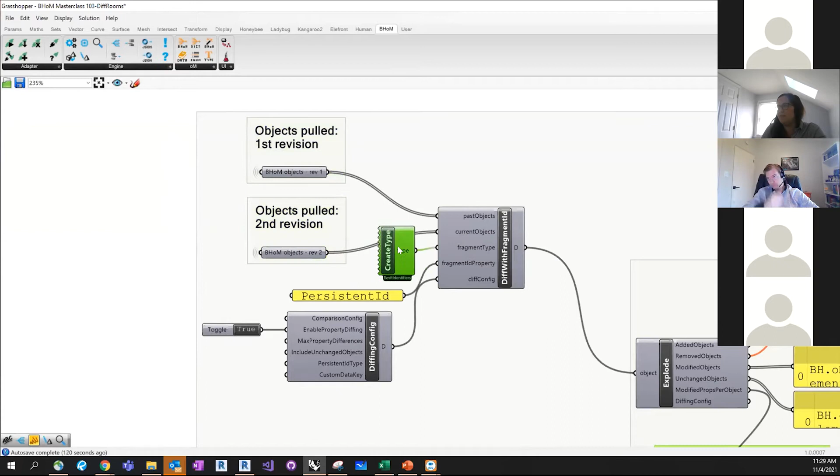And then, since I was already plugged in, what you should see over here, if you explode this, a concept we somehow did not explore yet, but it's my favorite thing. If you go to the engine methods and this little explode component, that basically allows you to see anything in more verbose format of what exactly it is. You can also use this explode on the room objects and you could see their properties. You use that all the time because you're always looking at properties of things. So we see that the room object was comprised of perimeter, location, name, fragments, all that good stuff.

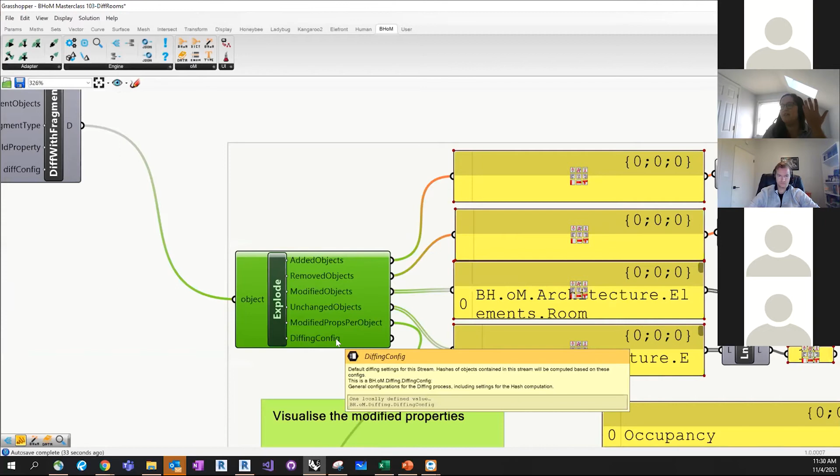So that was an explosion over here of that diff. So this is the diff engine method. The explosion of it has the added objects, the removed objects, the modified objects, things that did not change, the properties that changed when things were modified, and then the config setup here. So we can see that we didn't add anything, which we know is true. We didn't remove anything. We did modify 8 objects, either by geometry or data. And objects that did not change, there were 10 of them that didn't change at all.

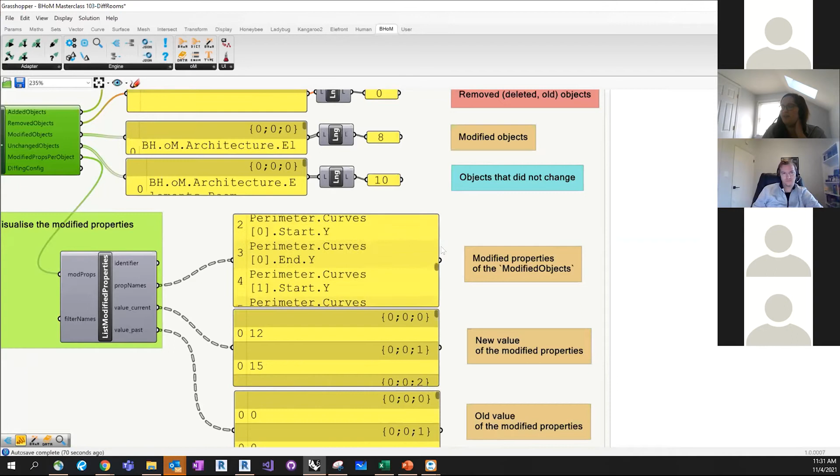So if we start to look at the modified properties per object, again, just an explosion of the other one. Here we've got our property names, occupancy for the first 2, and then perimeter curves for some of the others because we did shift that wall in the north. So you can see that in a very long list format if you wanted to over here. Some workflows I've used this for, like I mentioned, seeing differences in mechanical equipment over time, seeing differences in architectural rooms, seeing plumbing fixtures that the architect has added, because that has lots of pains for the public health engineers over here.

Lighting designer changes, lots of being able to do this. I know you could do it in BIM 360 as well, but this allows you to actually do something with the objects. So you could add this into a workflow for day 2 things where you're saying, I know I placed all these things, but now make these modifications based on changes.

So like I mentioned, Pavel set up a little tool for us to be able to visualize them in red, green, and yellow inside of Revit. Bits like that, pretty standard workflows that you would imagine that you probably already have scripts for, but this is just doing it all at once with one little nimble engine method.

Sorry, Kayleigh, I just wanted to note on that too. The huge thing is what you mentioned with building it into workflows. So it's not just identifying diffs, but it's reacting to them. So it's really cool when you get to the point of you don't just find out what changed, but you can actually codify what process you do based on things changing and how they're changing. So I think there's a lot of potential there that we're just starting to explore now within BH, and hopefully others are exploring as well.

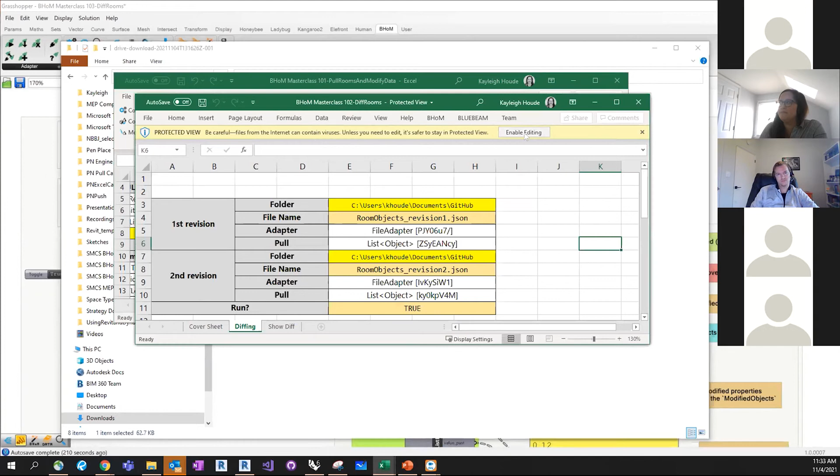We can see here, this might disappear again on me once I enable editing here because it's protected. You could see that the diff is set up here in exactly the same way, where we're pulling from file adapter first for that first set, pulling from file adapter for the second set, telling it to run, and then getting that first list of objects from up here and here. The fragment type is Revit identifiers, persistent ID, the diff config being set up, and diff fragment ID here.

And then we're exploding this thing at the bottom of the Excel sheet, and then showing it in this tab over here with the modified object being here, the element ID I would need to pull separately, and then the name, number, occupancy. So you could pull out any Revit parameters that you really wanted. Alessio Lombardi was helping us to set this up. Getting the Revit element ID is not a parameter, so maybe that's the issue there, which is why it's showing up as 0, but we can troubleshoot that.

All right, so I'm going to enable editing and just show you how we would run through this. I'm going to Control-Shift-B and find my file adapter, with folder, comma, file name. Cool, we see that they both popped up now. And then the fragment type in this case was Revit identifiers. So I'm just going to type that in. It is a fragment, so it's a type here. So it's that bottom one.

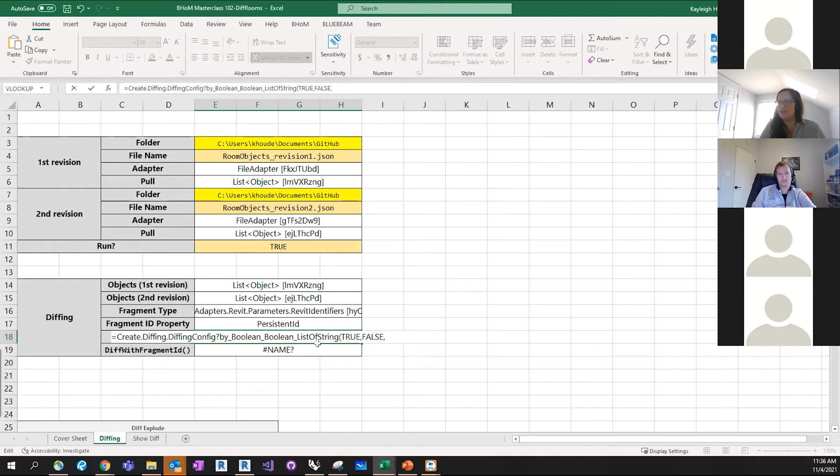The diff config in this case, we're going to use that longer one here. Compute diff with fragment ID. I think that's the one. Nope. Down a few more. Yeah, Kayleigh, this one, right? Yeah. All right, so I've got that guy. So now enable property diffing, I'm going to set that to true. Store unchanged objects, false. Property names to consider, false. Should be all good there. And then diff with fragment ID.

Which property was this? Ah, it's the BHoM engine method. It's hiding on me. All right, so we've got our past objects, the first one, the current objects, the second one. Sorry again that you can't see my helper text popping up, but hopefully you can see it on your own screen. It's over on my left side here.

The fragment type that we're doing is by Revit identifiers. The fragment ID property is this guy. The diff config is this one. Closing that up. Ta-da! You see that the objects are all here. And then if we go over to the show diff in this case, this is just reflecting those objects.

So query reflection list. And then it's this bottom guy. All right, so in this case, I'm going to pull them from here. I want to see the modified objects specifically, and then the row that they're coming from. So I'm going to do row -2 to get the proper ID here.

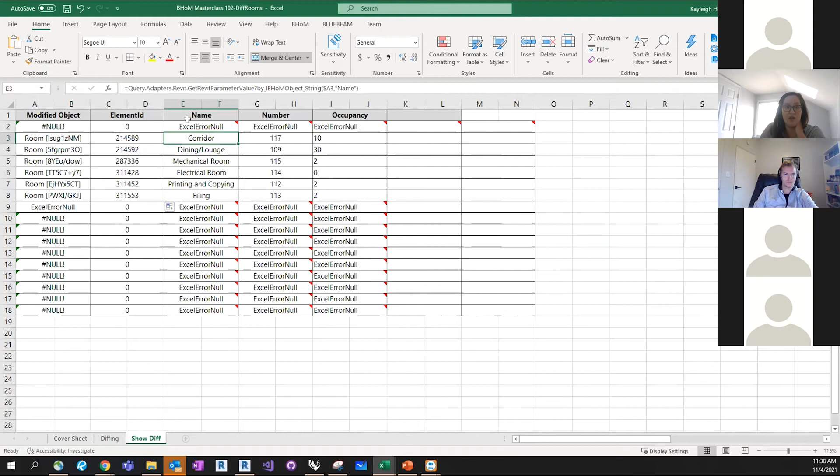So you can view the diff itself. So if you can imagine piecing this workflow together in real life, you could always create the diff first over here, and this being the diff object. You can actually pass that to JSON and pull that right into Excel. You can do lots of different work, but you can pass that diff and then set your workflow for replacing lights or plumbing fixtures or spaces or rooms or anything you can imagine.

So again, utilizing this in a day 2 type of workflow would be really useful. And that's you passing those actual objects along that came along with the diff.

All right, looks like most everybody is back from break, so we'll go ahead and get started with our second workflow here. So this one's going to be focused on creation, interoperability, and analysis. So we're going to be looking at how we create BHoM elements. So similar to how you'd go about in Grasshopper, for example, creating geometry, how we create data-rich BHoM objects, how we send those to analysis.

So we're going to start with creating our structure from room geometry. We're then going to move on from there to pushing BHoM objects to analysis. We're going to use SAP Toolkit for that. And then based on that, pulling those sized objects, we're going to send those sized objects to Revit. So similar to a typical structural workflow where we begin with our general setting out geometry. We go through analysis, we get everything sized, then we want to bring it into Revit for documentation and for our model. And then from there, we're also going to look at analyzing our BHoM objects with LCA results.

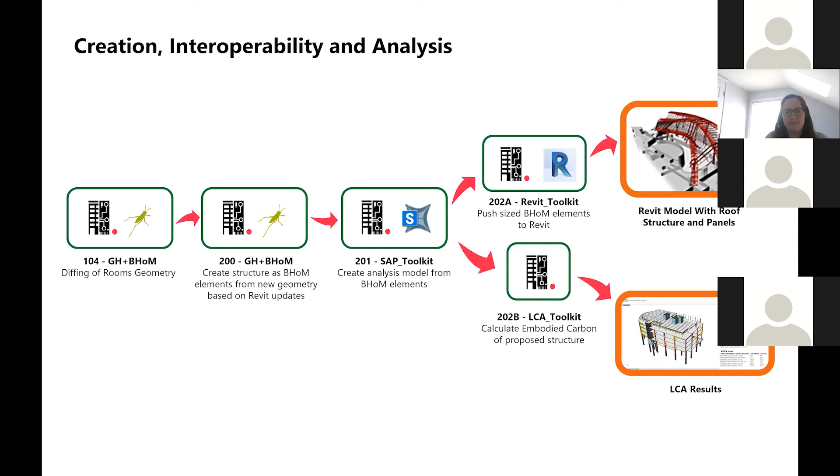So with that, I'm going to go ahead and pop over to Rhino. So you can see I've already got Rhino open with Grasshopper. So if you don't have that open already, if you guys can go ahead and just open up Grasshopper. And then from there, we're going to go to our scripts. So wherever your scripts are saved, if you guys can just open up the 200+201 script for those of you who are following along. And we've got that here.

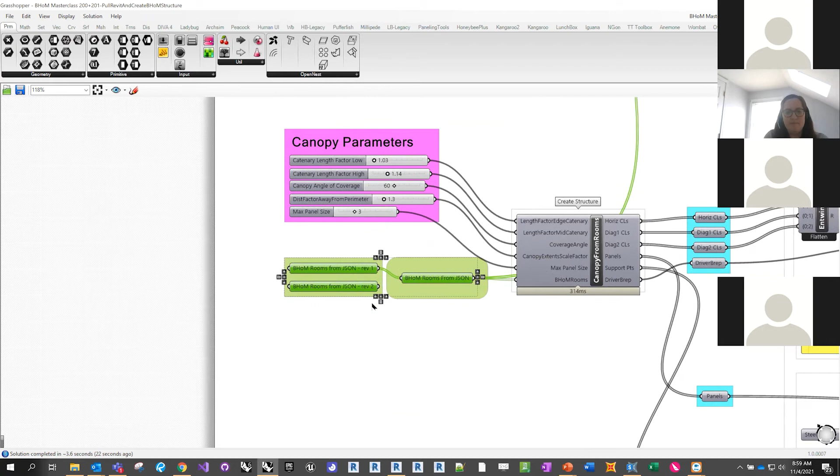So this is our script that's going to be creating our BHoM structure. So we're going to be creating elements, turning them into BHoM elements, and then from there, we're going to send those to analysis. So just touching on some of the fundamentals similar to what Kayleigh was going over. We've got our from JSON. So in this case, I've actually just gone ahead and jumped to already pulling in the JSON. Kayleigh's already shown how we have pulled those from a file adapter.

So typically we'd have a file adapter, pull from JSON, pull those specific files. In this case, I've already gone ahead and just internalized those two options that Kaylee had. So we've got those internalized as BHoM objects. If I hover over them, you can see we've got our Architecture.Elements.Room, as Kaylee was saying before. And then one thing she touched on that I just want to expand on a little is this explode option, which does let us look at all of our properties. So as you guys are using the BHoM and getting more familiar with it, use this component a lot.

Get used to using it just to understand what properties there are on objects. So this is like a really handy shortcut. It's showing you all the properties on each of these objects. It's going to react to whatever you plug into it. So if I plug in different objects, it's going to show me all those different properties accordingly. You'll see how this changes.

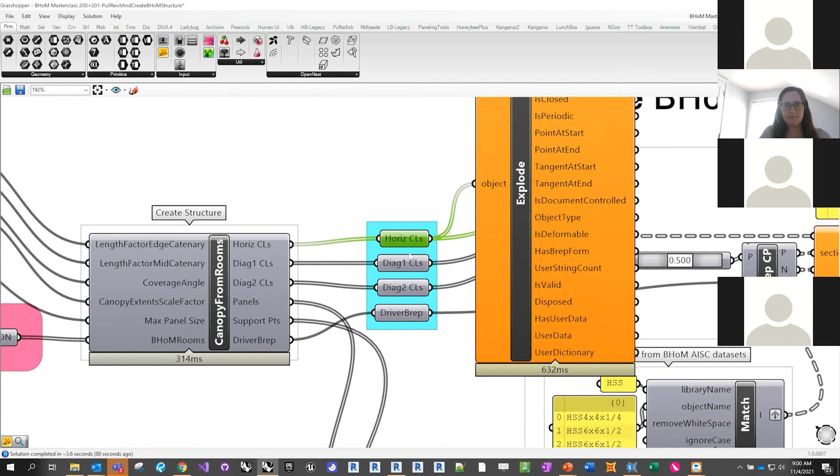And one cool thing here that I want to touch on is those things that I just plugged in, and I get that we did this little bit of notification there, but some of this stuff that's in here is going to be based off of our native Rhino objects. So we can actually explode native Rhino objects too and get some of that information. Now, obviously some of it's limited, but you can explode BHoM and non-BHoM objects. So we've actually stumbled across some neat tricks we can do with that.

But if we look at a BHoM object, for example, we are going to get all of those BHoM properties specific to that BHoM object type. So explode is a really handy component to take advantage of as you're working with the BHoM, especially as you're learning and getting more familiar with the BHoM.

We also have our adapter. So in this case, I've got an adapter to a SAP model. What this is going to do is connect us to SAP. So for those of you who have SAP 2000 and are following along, you can actually connect to SAP and create this SAP model that I'm going to be showing. For the rest of you, feel free to experiment with these scripts during or after the class with different structural analysis packages if you have other analysis packages, or even just sending to different software, or like we're going to show at the end of this, sending to Revit as well.

But in this case, what we're doing is we're connecting to a SAP model, and this is a SAP base model. So this is a fairly typical workflow we use where we have a shell model that might have our load cases or other criteria set up already if we're not including that in our parametric workflow. And that's just a container model that we can push all of our parametrically generated geometry and data into to run our analysis, either through an automated fashion of running analysis, which I'll show you guys, or through just having that analysis file that an engineer comes in, designs, and then we pull that afterwards.

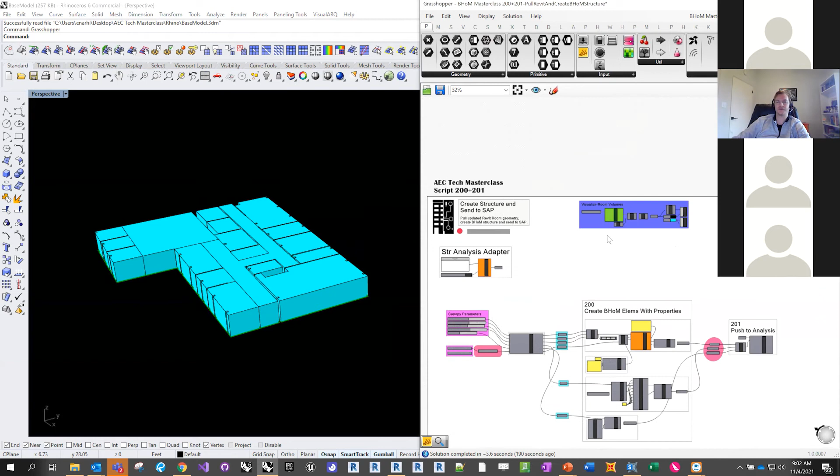So the first step of this script, again, we're taking those rooms that Kayleigh had from before, so you can see that we've got those rooms here. Now in this script, and this is something I wanted to highlight, we kind of jumped ahead and covered this in the last set of scripts, but in this case, I don't have that fragment with the geometry of the rooms. But what I do have is this perimeter property. So these JSONs that I've internalized in this script, and that you guys will have if you're working with this script as well, were pulled without the pull config to pull surfaces. So in this case, all we have is our perimeter of the rooms, which we can see here.

And this is a property on the room object. So a room has a property for a location, which is just a center point location, similar to how spaces are defined in Revit. And then we also have a property for perimeter, which is the curve that defines the footprint of that room. And that's what you can see there. So in this case, for the geometry preview, you'll see that we've just extruded those to show us what our volumes of rooms are. And if we were grabbing this from this diff, so I didn't want to get too redundant with showing the diffs over and over again, but this would be the diffing information that we'd be pulling from the workflow Kaylee was showing.

And of course, then if we look at these two different options, we're going to get slightly different geometry as a result that corresponds with the geometry change that Kaylee showed. So we'd be able to read in that diffing and understand, because our entire geometry is set out based on that, how it's affecting our resulting structure, how it's affecting our parametric rules, our script, and how that could then affect our outputs as a result. So that's another case where diffing really comes in handy, is when we're reliant on certain inputs that are changing for a script like this, for a geometric setting out.

We've got a couple projects going at the moment where this is actually super relevant, because this is exactly what's happening on those projects: we keep getting input geometry changes that are affecting our driven structure. And we're able to highlight those changes and basically select, some of them we want to keep, some of them we will account for, and then other times we can push back and say, we've done the diff, we see that there's some changes we're not okay with. Can we compromise on this, or do we really have to make these changes? We can start to have that conversation around those diffs.

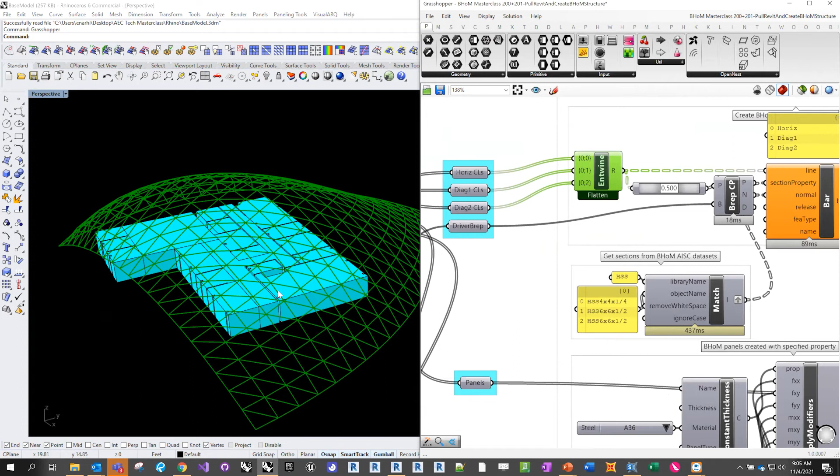So in this case, we're creating this bar. We've fed in the geometry, so fed in all the bars that correspond to these different members, which from the script have been sorted into 3 different design groups here, essentially diagonals in one direction, diagonals in the other, and horizontals. And then we are creating our bars, and the creating of the bars is where we really get a lot of information. So this is where we're using our data sets that we mentioned before. And in this case, we're using this match component that's going to let us search through a library for objects of a specific name. And what this lets us do is really easily get section information.

And this is data rich section information. It's not just a string. These sections are actually, if we just explode them, sections that have been pulled from our data set with all of the information that comes with them. So this is like all the data that you get from your steel table, for example. So you've got sectional areas, you've got your radii, you've got all your structural properties, you've got materials assigned, and then obviously you have the name of the basic section as well. And so this is a really rich way for us to say what the bars are, say what kind of section they are, include all of this critical data that we need for whatever we're sending it to.

And then from there, we have a bar that has a lot of information assigned to it. It has, obviously, that center line that we mentioned, but then does also have all of our section properties, start node, end node, all of this information to go with it. Sorry, is that section information already built into BHoM, or... yes. Oh, okay.

Yeah, so here what I've done is I've used this match component, which will pull from a library with a specific name. So this is pulling from a BHoM library, but if you don't know what names to search for or you want to do it through dropdowns, the same information can be accessed through here. And if we go to section properties, US steel sections, HSS, this is the same data set.

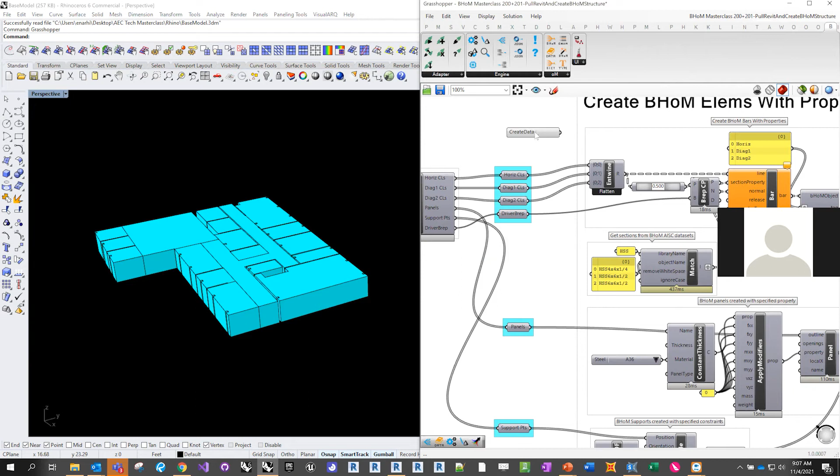Any other questions before I move forward to look at how we assign panels and supports? Just want to say that's awesome. Sorry, you wanted to see the... Oh, no, I just wanted to say that that's awesome. Yeah, cool. Well, I'm glad you like it.

Yeah, I think the data is one of the big things we've started to put a lot of energy into and that we're structuring around now. Since we have the framework, we started with those sections because it was for structural workflows. You obviously need all your structural sections, but now we're starting to see a lot more power behind having similar data sets for things like EPDs for LCA.

And now we're moving forward beyond that, looking at how we do LOD 100 data sets for generic properties, for example. So having generic wall constructions for low performing versus high performing and things like that, that we feed into our workflows, and we really get a lot of value out of those too. So really handy. And again, there's just this dictionary up here, our data sets that you can drop in and explore.

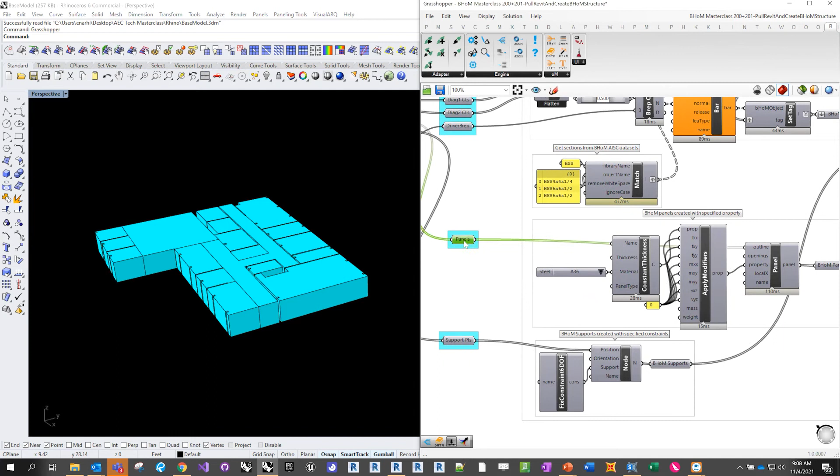So hopping over to panels now. In this case, I have a series of surfaces, something you're familiar with. These are just the polyline curve defining the boundary of each surface. And I'm going to create panels for this. Now, for those of you who are structural engineers or have done structural analysis, you might recognize what we're doing here in terms of modifiers.

So I don't actually want to analyze these panels as structural panels, but I do want to be able to account for their weight in my analysis. And I'm doing that by applying modifiers, which BHoM also supports. So we're able to do property modifiers so that we can basically put in all that data that we would have to put in manually in SAP or in our other analysis software. And by doing it in a generic way within the BHoM, we can define a panel from an outline and then a property with these modifiers.

And then whatever analysis software we're sending it to will basically digest this information and translate it into how that software understands those modifiers, which in the case of SAP is pretty similar to what you see here. It's just going to take each of these fields of the different structural properties of that property and change it from 1 to 0, essentially.

But we've started that off with a constant thickness property here that we've defined, this one not through a data set, but just through custom creation. So we're creating a tip panel property, and its thickness is 0.05 here. You can see the material that we've assigned. Again, this material is from a different data set. This one is from the steel data set that we have for just steel materials.

And another nice thing about these data sets is if you hover over the dropdown, you can actually see all the information for the data set. So you can see where it came from, who it's provided by, who the publisher is, when it was extracted. And something that's in the works right now, going to be released on our next release, our 5.0 release, is data integrity as well.

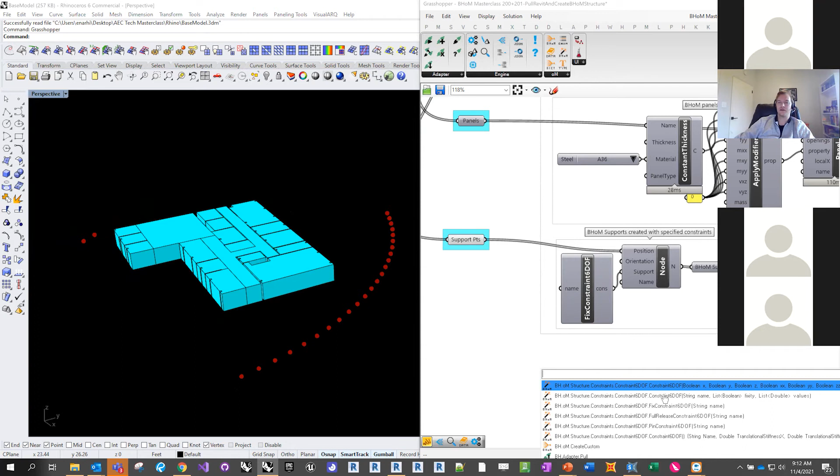We can define with our 6 degrees of freedom constraint through Booleans what all of our different releases are. Alternately, we can also just take one of these pre-cooked ones for something like a fixed constraint or a full release or a pin constraint. In this case, I've just said that these are all fixed. So I've assigned that constraint as a support condition on the node. And what I get is a node that is constrained with a fixed constraint. So when I send that to SAP, I'll have my support conditions ready to go.

So those are our BHoM elements ready to send over to our analysis. Before I send that over to analysis, are there any questions? All right, we will go ahead and, oh, yep, go for it.

When you're generating your canopy structure, you're not really connecting it to the Revit model, right? If you change a wall length, the canopy might cross your existing structure. Is that correct? Yeah, so what I've done here for this generation is it's just extracting the room bounds essentially. Okay. And then building out based on that. But this, I would say, think of this as more of an abstract stand-in for whatever geometry generation you're doing.

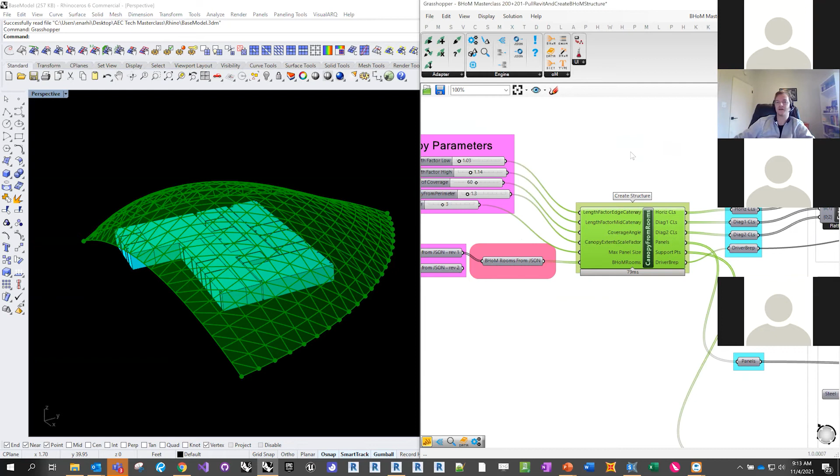This is by no means a refined, finalized structure for the rooms that we're showing, more just a proof of concept that would often in our workflows be a standalone script that's managing that geometry generation, for example, but it is typically responding to grid lines or bounding boxes or Revit setup, or like you said, there could be a wall that's clashing and we're defining it based on that. Yeah. Perfect. But here it's just specifically looking at the bounding box of the rooms. Perfect. Thank you. Yeah, of course.

All right, so once we've got all of these objects, I'm just going to go ahead and highlight those so that we're looking at our BHoM objects. So this is our collection of objects that we're going to send to analysis. Before we send it to analysis, I'm also just going to show the bars in 3D. So once we've assigned section properties to these bars, you can see that we can also see them three-dimensionally rather than just lines. So we're extruding based on those sizes.

You can see that the horizontal members are smaller than the diagonal members because we assigned a smaller size here accordingly. So just being able to visualize in 3D is a bit handy to understand what we're sending over beyond just that two-dimensional line information.

Once we've done that, we're going to go ahead and send over to SAP. And to do that, all I'm going to do is change push elements to analysis to true. Now, what this is going to do is if you don't have SAP open, this is going to open SAP, open the file that you've specified, and then create the geometry. So I'm just going to click true, and we're going to see SAP do its thing.

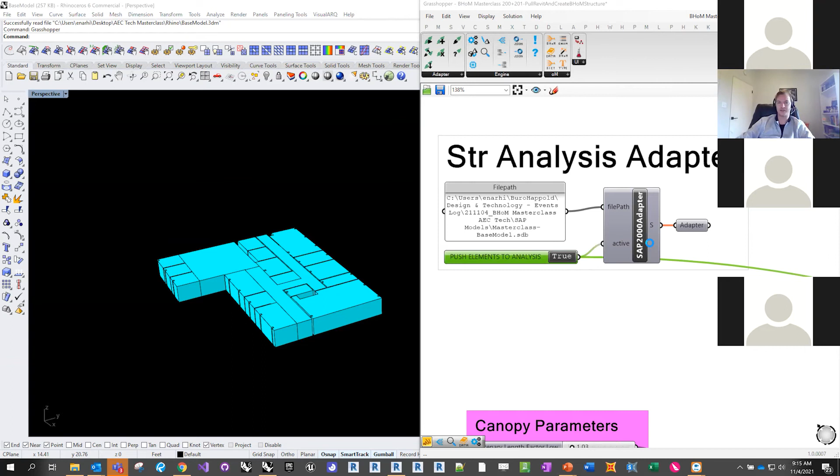Actually, I already had it. I think what I'm going to do for this one is close it intentionally, because I already had it running, and show how it opens here too. There we go. So I'm just going to restart that to show you what you would see if you didn't have it open. Let it finish thinking since I closed it. So now you can see that it's opening SAP.

And if you saw there, the file name changed because it opened the file that we specified for it to attach to. And there we go. Now we've pushed over all of our structural elements. So pretty quick, pretty handy. And if we look in, you can see the sections assigned in SAP align with the sections that we had specified based on our BHoM properties.

So 4x4 by a quarter for horizontal. If we look at the panel, for example, 6x6.5 on the diagonal, and then we have all of our panels in here with the section assigned accordingly. So it's as easy as that for us to create our analysis model from our BHoM objects. You have a few options for how you want to interact with analysis with the BHoM as well. So in this case, I've just created an analysis model.

For those of you who are following along, you could just do a save as now to whatever you want to call this. I'm just going to call it masterclass example. We'll save that. Another option for how you interact with SAP, if you don't actually want to go through the process of going into SAP and editing stuff, is we also have execute methods. So I just wanted to make sure I highlight this.

I'm not going to be using them in this demo, but we have these execute methods, and what they let us do is actually send commands to adapters as well. One of the most common that we would use is this analyze command. So, you know what, we'll go ahead and do it. In SAP right now, I have a model, but it hasn't been run, right? Nothing's been analyzed. Usually if I was using SAP, I'd have to go and click analyze. I could click a bunch of stuff.

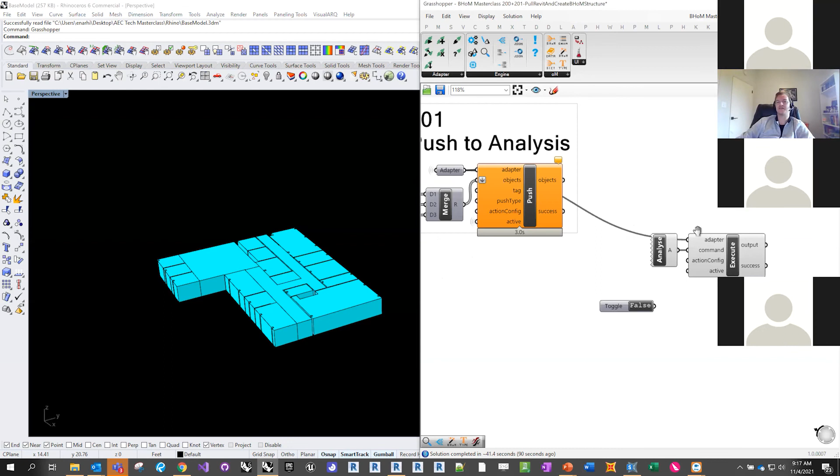But what if we're doing a workflow where we want to iteratively study different designs and we don't want to have to open SAP for each of those? These execute methods let us basically silently operate these models. So just a quick example of that. If I have this execute with the analyze command plugged into it and I set it to true, you'll see that now SAP has run and analyzed it. We get SAP graphics where deflections occur, and you see the lock sign: the analysis has run without me having to open SAP.

So we can use that for workflows where we want to send geometry, run an analysis, and extract results without doing anything else in between. Really handy for some of the workflows where SAP is basically just running the analysis in the background. But for the sake of this demo, I'm going to show a workflow where we've already designed that structure separately. So in this case, I've pushed the model that we just saw. An engineer has gone in and done their steel design.

And this other file that we've included in the SAP models folder, the one that includes analyzed, is a typical end product of the SAP analysis process, right? We have different sizes that have been assigned, in this case with steel design. So we no longer have just the typical member sizing that we had before. We now have analyzed section sizes that we know work with the proposed structure. What we want to do now is take all of this sized structure and pull it back, then visualize, run LCA, and send to Revit for our documentation, as the final location to hold that model information.

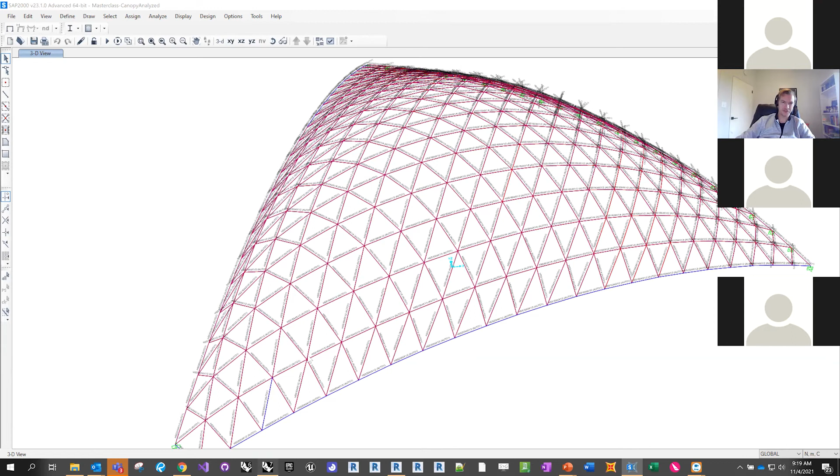So I've got this analyzed model open, masterclass canopy analyzed. And then I'm just going to hop back over to Rhino. We're going to get rid of what we did here. And I'm going to go ahead and open the other script that we had titled 202. So for those of you following along, please go ahead and open 202. Actually, before we do that, are there any other questions before I hop over to that part?

I know we're dealing with SAP, but do you also provide integration with RAM? Yes. So we have a RAM toolkit. We've gotten a lot of usage out of it in the US. It's especially useful when we're doing high rises where we need to do gravity design. So absolutely. It is a little bit more limited than the SAP toolkit and the Robot toolkit and ETABS toolkit, for example, just because of certain RAM limitations.

So it's worth mentioning, but if you're bringing in a bunch of levels with beams and columns and doing typical RAM gravity design, for example, it works great. We use it for that all the time.

Gotcha, thanks. Yeah, and I'd be really excited, so RAM toolkit's actually one of the ones I was leading development on, so first of all, if you are able to use it, get in touch and we'd be happy to help you along the way to take advantage of it. And also if you have any feedback on features you'd want added beyond what we currently support, we're always happy to get that kind of feedback and include it in our development.

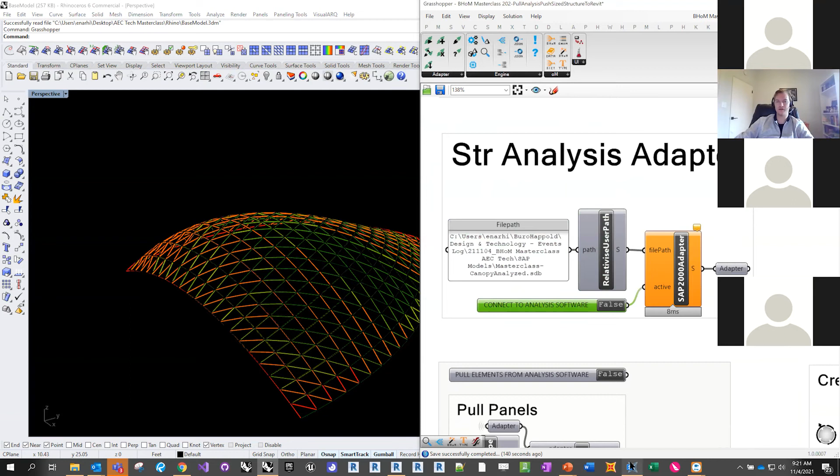So again, in this case, if I try to pull elements, I just want to highlight that you'll get an error saying you're not connected, because we always want to make sure we connect to the adapter first. And in this case, we have our structural analysis adapter here. I have the analyzed model that I want to open. So I'm going to go ahead and say true. I have that model open already, so that was pretty quick.

We're connected. And now if I want to pull elements, in this case, you can see we're pulling different kinds of elements. And Keely mentioned this last time, but just to expand on it, when we're putting in requests for pulling elements, you can do pretty complicated requests where you do a logical and with parameters or filtering by types and other properties of the object. You can also do a really simple pull where we just say what type we want to pull and leave it at that. So in this case, I'm just saying from SAP, pull all the bars.

So pull our bars in SAP. I want to get all that information. And then pull all my panels in SAP. I want to get all that information as well. So I'm going to go ahead and toggle that to true. Takes a few seconds as we're pulling all that information.

For those of you familiar with Grasshopper, which sounds like most of you, you'll see warnings sometimes, which is a typical thing you see in Grasshopper. And we've included in the BHoM these warnings along the way to let you know certain things that are happening. In this case, it's just letting us know that a certain section property wasn't able to be read. In this case, that's fine. That's actually not assigned to any of the objects we're pulling anyways.

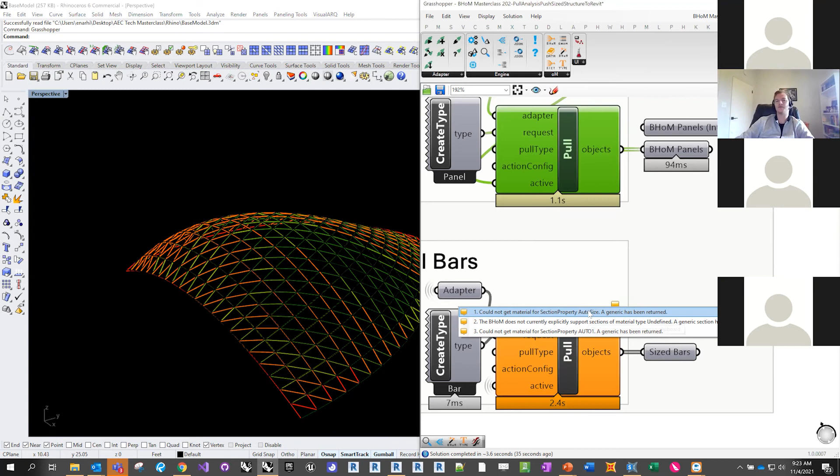But we do have these warnings that pop up along the way that you can always read to understand what's going on inside of the pull or inside of the push or inside of anything else you're doing, and helpful errors to let you know if things go wrong along the way, why they might have been going wrong, and what information you might need to provide to get them to work. So in this case, we've got our bars. Those are all pulled. If I click preview, you can see that these have been pulled based on the SAP model.

And again, if we explode those, we can see their properties. And in this case, what we'll see is the section property name here. If we just explode that section property, instead of just 4x4s and 6x6s, now we have all these different sizes based on the analysis, which is also what we're visualizing here. So we've been able to pull all that updated size information from SAP.

If in the SAP model, for whatever reason, the engineer also needed to move certain objects around, we could choose to pull those new locations, or sometimes what happens is we actually want to keep the old locations and just update the new properties. So we have that option as well, which relates to some of the diffing that Kaylee was showing, where we're able to diff based on what changed, and then selectively take from what changed just the parts that we actually want to change.

So it's pretty common when we're updating Revit, for example, to say we want to update sizes, but actually Revit has the more exact element locations because that's where we're refining that, whereas analysis might be snapped, might be idealized. So we don't necessarily want to always take the exact locations from SAP or from our other analysis models. So those are our sized bars. We also have our panels that have come through as well.

And then just for some of the visualization that I'm showing here, I do just want to touch on some of our engine methods. So from this collection of sized bars that I've pulled from SAP, we're able to do engine methods for all kinds of stuff. Some of this is obviously super simple, like just getting the length of the bar, nothing too crazy. But these engine methods give us really helpful ways of extracting key data from our elements. So things like volume, for example, if we were going to do a tonnage, we can get that straight away from those bars. We can also get properties.

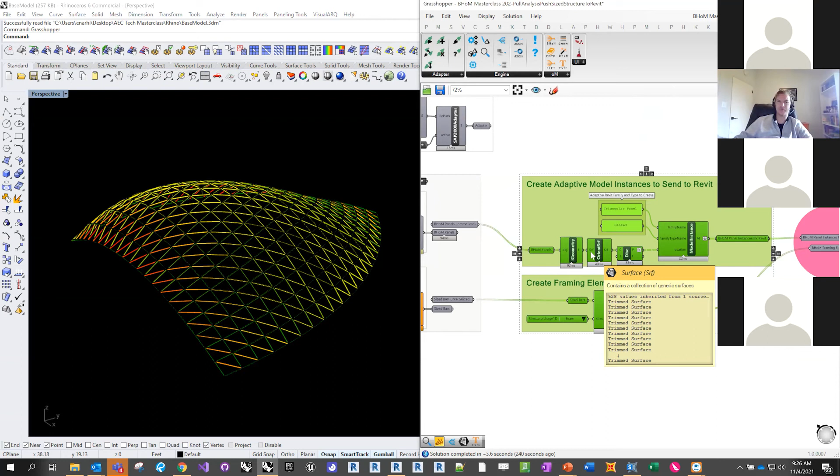Now from there, I'm doing a bit of conversion before I send to Revit. The nature of Revit, typically we want to set things up to align with things like type names, family names, certain parameters. So we typically do have this little bit of in between where we're slotting in that parameter information that's going to go to Revit to make things really look right and read right on documentation and in their actual 3D location. And in this case, I'm going to start with the framing elements. So pretty straightforward, but we've just taken those bars and said whether they're beams, columns, or braces, or you can see the other things that are shown here.

This is basically converting a structural element into a physical element, which is going to give us richer properties to send to Revit. Things like orientation. So being able to say if it's top justified, for example, and being able to specify if we want to create beams or braces or columns based on Revit's nomenclature. And in this case, it's as easy as this one component to create those framing elements. So these are ready to send to Revit.

At the top, it's something a little trickier. In this case, I wanted to show how we could use adaptive components. For those of you who have used Revit and these kinds of workflows a lot, I'm sure you're familiar with adaptive components. A really nice thing about the BHoM and Revit toolkit is that we can also create any adaptive components derived from BHoM objects. So in this case, all I'm doing is taking our BHoM geometry and then creating a model instance here, which is a Revit toolkit specific object.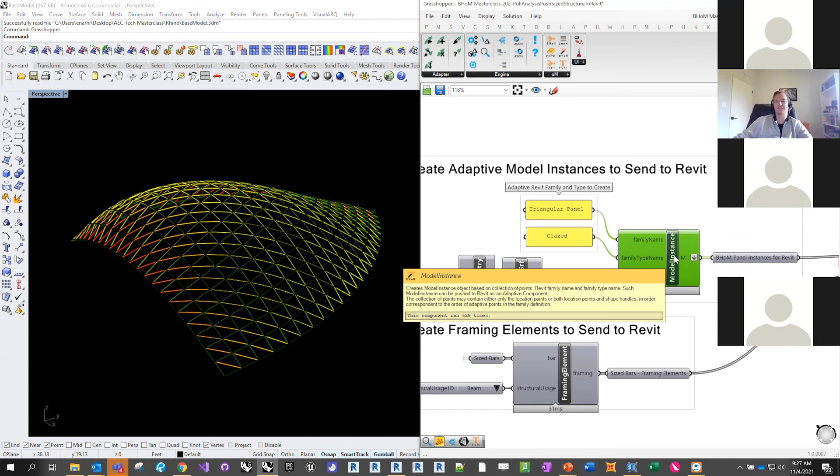You might remember from the chart that Kaylee showed where we have oM, engine, adapter, and that all makes up a toolkit. So in the Revit toolkit, part of that oM is some custom objects, and this is an example of one of those, which is a model instance. So this is a BHoM object that's specific to the Revit universe. It's specific to that world.

In this case, it lets us take a location and then family name and family type name information based on the Revit family. And we can create these adaptive component elements in Revit accordingly, which we'll see in a second when we do the push. So once we've done that, pretty straightforward. And now we have our objects ready to push over to Revit. And before I push those to Revit, again, I'll just ask any questions.

Just a quick one there, Eric. The converter component that you talked about, converting the bar to physical element, does the end type become the same as the physical beam? Because that was going to be my question, is for structural analysis, wouldn't you want to use a beam if you had a specific one?

Yeah, so the bars are the specific beam. It's just the conversion. You'll see the namespace changes on these. So bars are structure specific elements that have all the properties we need for structural analysis and sizing and all that stuff. And then at the end, we get into something that's in the physical namespace, which is a physical object. So it's a different namespace and a slight difference in how we define these elements.

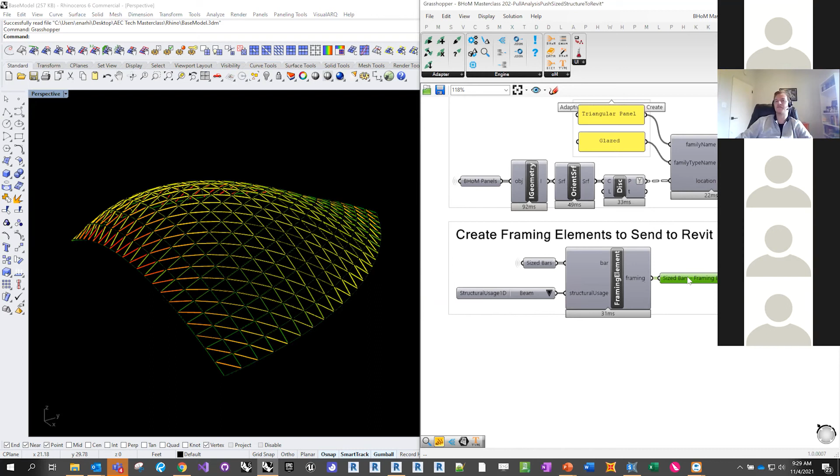In this case, the biggest difference is that from a bar to a framing element, we're specifying what the structural usage is. This is where we go from bars being any generic 1D element for analysis to a difference between beams, columns, braces, and then also having additional physical specific properties. So this is where we'd also layer on thermal properties, for example. A bar has the thermal coefficients relative to analysis, but it doesn't necessarily have other properties like EPDs for LCA, for example, that we might have on the physical element.

Got it. So it's almost like a subset superset relation. Yeah. If you think about the diagram that Kaylee was showing before, let me actually pull it up on screen, because I think this is a really key point of how we approach this, right? These different versions of the truth depending on discipline. And we've sorted those out from a code perspective by namespace.

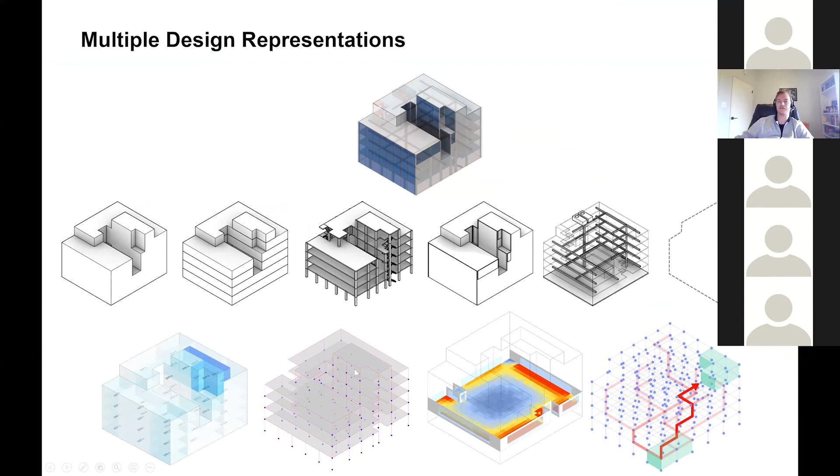So a beam and a bar are mostly the same, right? But there is a difference in how a structural engineer describes a beam versus how Revit, for example, describes a beam. And so we just use that as a way to capture the nuance of those different descriptions that feed into the different analysis, different software, et cetera. But they're all convertible, right? They're all still derived from this parent notion of what these objects are. It's just that certain properties are tweaked along the way for their custom usage.

Got it. Perfect. Thanks. Yeah, of course. It's a good question. Any others?

From the way you're converting from the elements to Revit, I'm guessing, and this is me just thinking out loud, there's no opportunity to interact with, say, Rhino Inside, for instance. This is all in BHoM's world.

It is, but another thing that's currently in development is looking at compatibility with Rhino Inside and how we do the best of both worlds. There are some features of Rhino Inside that we don't do in BHoM that we really like, and there are some things that we think BHoM handles better for our usage, especially general notions of data-rich objects with a specified namespace and a specific structure. So I think there's a place for both.

In the installer that we sent to you all, there's not really anything to do with Rhino Inside, but that's in development, and we're looking at how we best take advantage of what Rhino Inside gives us, and also try to add the BHoM as a module in Rhino Inside that anybody could use. If they're not using the BHoM but they're using Rhino Inside, they might as well get to use richer objects with more features. Gotcha. So we're looking at how we leverage that going forward.

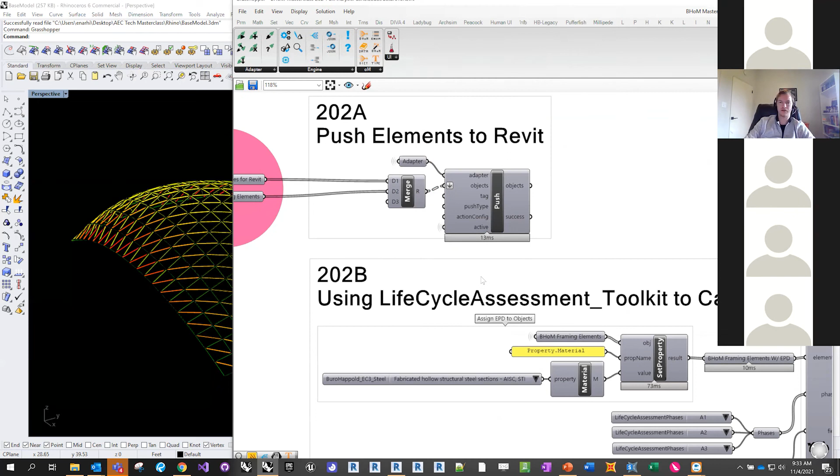As soon as we click push, we're going to be sending stuff to Revit. This does take a little while, for those of you familiar with pushing to Revit, given that it is a database and given the API. It's going to take about 30 seconds.

A similar workflow to what we used to do way back in the very early days of Dynamo. A shout out to Konrad, who's doing one of the other master classes, but we used to use Mantis Shrimp, which also took a similarly long time. It's a similar workflow, as far as you're creating your objects, sending to Revit, and they appear in Revit.

That's great. So here we're going to go ahead and push to Revit. I'm going to toggle that to true, and we're going to give it some time to think. As it thinks, it's going through and sending all this information to Revit and populating it.

No, it has not sent. Oh, I've literally just done exactly what Kaylee did. Kaylee, we're learning from this, right? It happens.

Always remember to activate the adapter. If you don't activate the adapter, you get this handy warning, which hopefully is self-explanatory. By default, we have the adapter not active so that you don't have 20 instances of Revit all trying to connect at the same time and clashing. So we're going to select activate. We are now connected.

This time when I send stuff over to Revit, we will wait about 30 plus seconds for everything to send. You can see Grasshopper's not updating, it's just thinking. We're sending quite a few objects, which takes a little while. If you're just sending a few objects, it's super snappy, so it depends on how much you're sending.

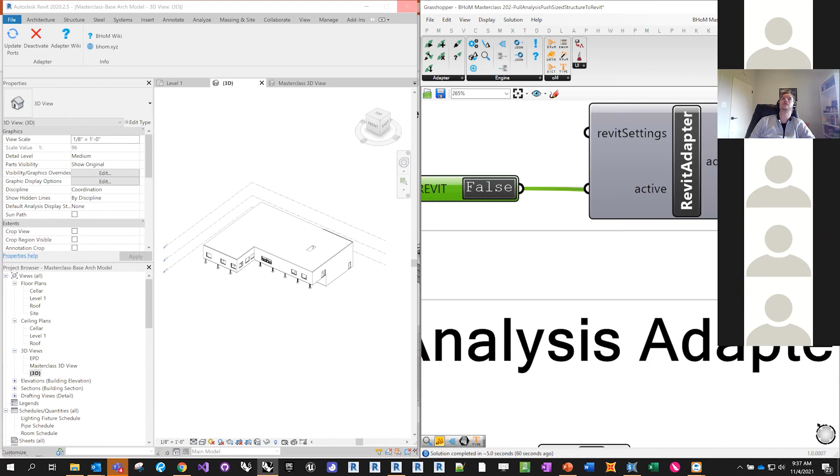Have you done a push with Rhino Inside of roughly 1,000 elements? Do you know about how long that takes? I have not. I'm super new to Rhino Inside, but I'm just curious. I mean, I'm curious too. We haven't, because we have this solution. We do some work with Rhino Inside, but probably not as much as some other folks in the AEC industry.

And I think it's an awesome development, right? Rhino Inside and Rhino Compute are super cool. So we're excited to see how we leverage that. But I think it does give us a good performance benchmark too for what we're doing. So now that that push is done, we have our structure.

You can see all our different member sizes have been brought over. It's proper Revit geometry. It's also oriented, so you can see different cross-section rotations assigned based on the orientation that we assigned in that first step, where we were orienting based on the normal of the surface. So all of these have been twisted along the surface. Now, obviously, we could also do no orientation and have these all be vertical in our default Revit format, but good to highlight the orientation option as well.

And we also have our panels. In this case, for our panels, I've just created a super simple adaptive component, the simplest imaginable. It's just a 3-point triangular panel with a glazed option and an opaque option. And all we've done is use the 3 corner points of each panel we extracted from SAP to create all these panels. Obviously, in typical workflows, we have more complex families for this.

Changi Jewel, for example, used a really early version of this kind of workflow with a triangular family that was super sophisticated, had frame edges, different LODs, all kinds of parameters for open versus closed and all that. So you can get pretty crazy as you get more into the details, but the ability to push based on that defined geometry and family type gives us a really rich connection between the detailed Revit-specific stuff and the other stuff we're doing within our BHoM workflows for analysis and other processes. But that gets us to our end result here in terms of a structure in Revit.

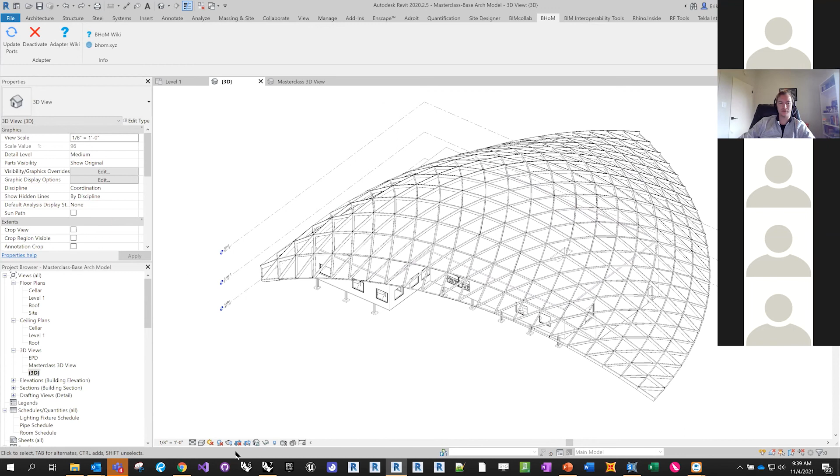Okay, cool. So LCA for this demo is quite simple and straightforward, and that is very deliberate because we've made the LCA toolkit and the processes involved as simple as possible so that people don't have to view LCA and getting things like embodied carbon as an additional process. It's more something that you just kind of get for free, plug and play, so that at any point you can understand what these critical values are.

And in this case, what I'm doing is I've taken in these framing elements that we created. The one thing that I need to manually assign is this piece here, which is what EPD is going to be used with our elements. For those of you familiar with LCA, life cycle assessment, the critical piece of it is these EPDs, which are environmental product declarations. They're essentially signed off accredited documentation that says how much embodied carbon is associated with certain materials or products.

So in this case, we have from the AISC data set, again, we are using these BHoM data sets. In this case, we have a data set for steel that's been sourced from the EC3 website, which is buildingtransparency.org. EC3 is super cool, all the stuff they've been doing. We have a live link to them as well called the Carbon Query Database that links to their underlying database, so we can pull EPDs from their database for any specific products we're using. But in this case, we're just using our general data set and assigning an EPD.

So the EPD we're assigning here is the fabricated hollow structural steel sections. This is an industry-wide EPD that was put together by AISC. And we're assigning that to our framing elements. And getting our critical LCA values is literally just as easy as plugging into these components. So once we have elements that have EPDs assigned, often on a larger project with a bunch of different materials, this would mean assigning all of our different materials based on the different elements that are being assessed. So based on their materials, just assigning an EPD on a one-to-one mapping, or sometimes on an element basis based on categories or things like that.

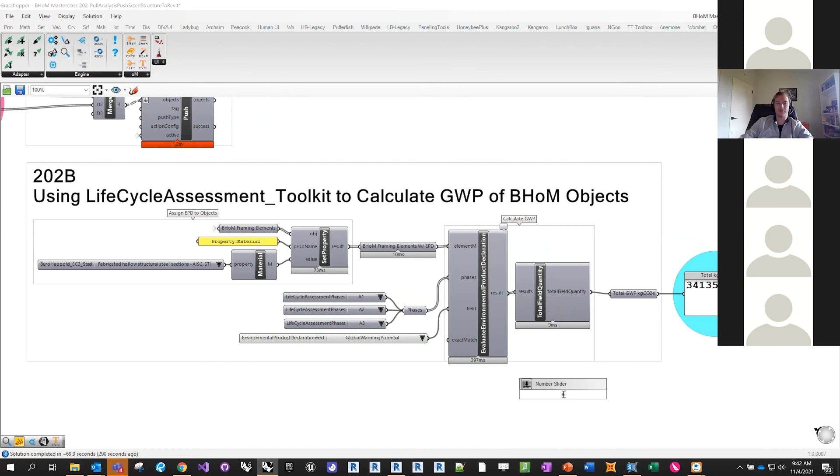And then from there, that's going to give us these result objects. Again, if we explode the result objects that we get out of this, they contain the quantity, so the value that was received, the metric that it relates to, the object it was derived from. Also, we can get the EPD that it was based on so that we can use that for documentation purposes. So you can see each of these shows the phases and then has that EPD as well. And then with this component, we're just taking those to get a total value. In this case, we're getting our total quantity of global warming potential. And based off of that, we're able to really easily see what the global warming potential of our proposed structure is.

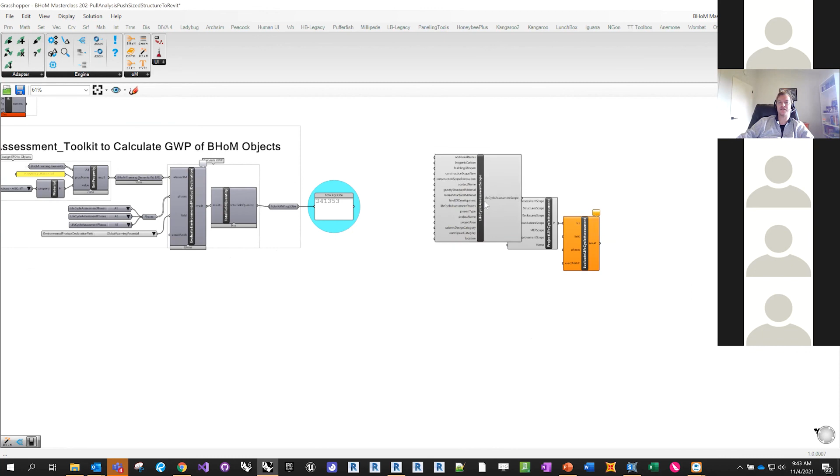Now we have a more involved workflow if we're doing a project-wide LCA, where we create this singular result object that we actually store in a central database for project benchmarking. When we're doing this, rather than just having a bunch of elements we feed into it, we actually curate it by scope. So we create a project lifecycle assessment. This project lifecycle assessment has all the data associated with that. So our LCA scope includes all of our building information. Our structure scope would include all of our elements from the structure, categorized by the different components they belong to. And what that lets us do is calculate the total global warming potential for that project with all of this metadata for what the building information is, how the global warming potential breaks down by category and things like that. And so we've been using that for our internal databasing for project benchmarking for embodied carbon.

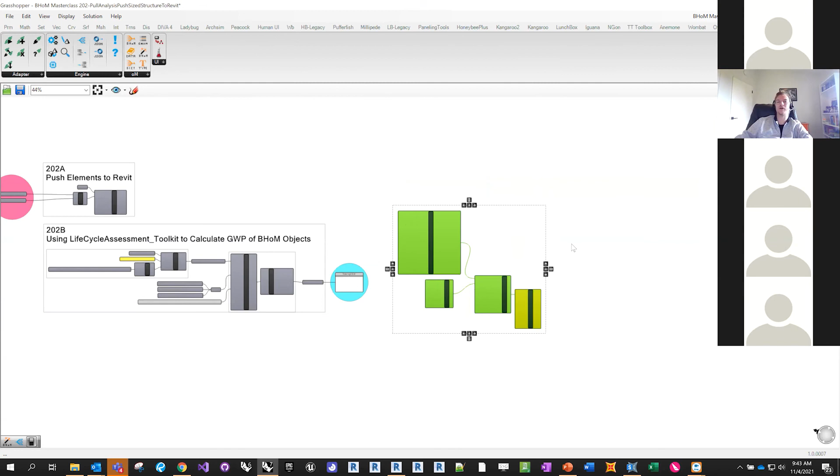So for each project, we're basically plugging in all of our different components, slabs, walls, et cetera, along with all the project data. We run our analysis here, so we get our result, and then these results are stored in a central database that we can query later on to understand average embodied carbon of different building types and where that distribution lies, what's usually the area that has the largest embodied carbon associated with it, so that we can understand routes to minimizing those values.

And other things like that. So that's been a really important piece of the LCA toolkit effort, being able to create a curated way of recording results that can be benchmarked and that can be collected and then explored moving forward.

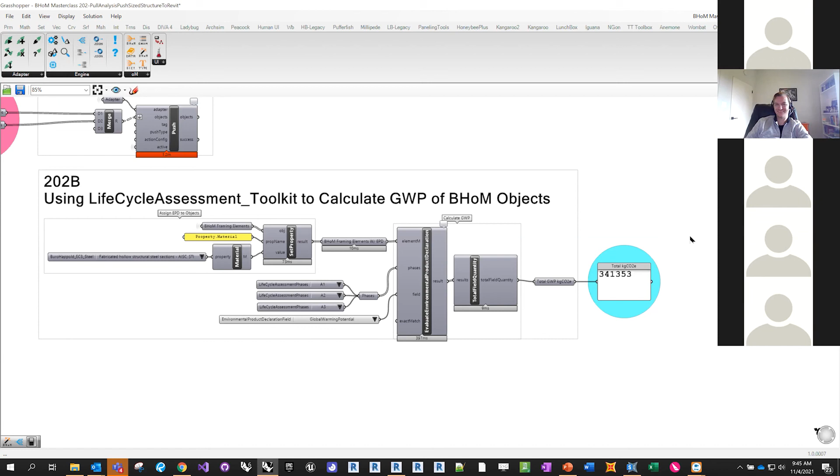And with that, one more little thing, Eric. Yes, please. So that number of 341,000 kilograms CO2 might be completely like, you don't know what that number means. We do have a fun little evaluate method being added in now to make that equivalency. It's a data set from the EPA so that you would know the number of trees that would have to be sequestered in terms of the amount of carbon, the number of cars per year on the road, miles driven, gallons of gasoline, all of that good stuff, so that you can make that number relative to things that we're familiar with as normal non-sustainability expert humans. So it's a good one that we're adding in.

That's a really good point. And also, on the project LCA evaluation I was showing, the way we store that data, we include a per area value, which is currently the kind of best practice for LCA, but still doesn't really tell the whole picture. But we do have that so that it gives a little more context on a project to project basis. Yeah, what Kaylee mentioned is great for giving more context to what that really means.

I think when you see it in terms of things like trees planted or miles driven, things like that, it really drives home basically how much worse buildings are for the environment than things like driving, for example. It's pretty incredible when we're designing these buildings, how much embodied carbon is going into them. And it's really important we try to minimize that. Awesome.

Do we have any other questions? If not, we can just move into a bit of a wrap up. I think we've robbed you guys of one of your breaks, but hopefully that's all right. But yeah, any other questions or comments or even just general discussion at this point? I think it'd be great to hear your guys' thoughts or any more information you guys would want.

So when I install the installer, does it automatically populate every one of the adapters or toolkits already created in all the other softwares? Yes. So the installer manages all of that deployment. Hopefully you're not sick of us saying coming soon, but I believe in the 5.0 release, the intention is that installer is going to have custom installation where you're selecting your toolkits so that you can be a little more specific. But as it is now, it's deploying all of these. So you've got your Revit add-in ready to go, Excel ready to go, and all these different toolkits and adapters ready as well. Cool, it's handy.

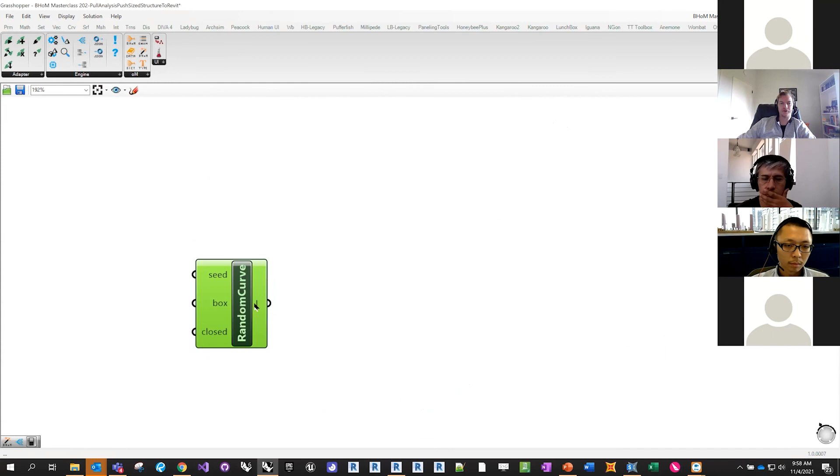So I've just created random curves here. We have a component to create random curves, but basically, if you're creating a curve, you don't have to have a data-rich object. There are BHoM primitives for geometry, for example, and you could run the diff on that instead. So you could do your diff on two different curves rather than on the super data-rich objects.

And it's just going to tell me how those two primitive geometries are different, or? Yeah, it's just going to flag that they're different and then show you which properties are different. I see. Cool. So if you did that with, for example, a Rhino model, it would just flag if two surfaces changed and the rest was the same, it would give you those two surfaces. So you could still run it in that way.

But if you wanted to see if layers changed, for example, there would be the extra layer of then setting the layer name as a property on the BHoM object to then run the diff afterwards. Right. So there's still that one intermediary step.

Cool. I'd also have a following question. I was wondering, when co-designing or collaborating, I see that we can use a Mongo database where everyone works on their machines and they pull and push to this Mongo database. I can imagine that the data would be structured well if we push the whole BIM model from Revit and then we work with it.

But how does it work in early stages of design when we push step-by-step customized elements that we design in Grasshopper? How are they stored in this database, or how is the structure? We have rooms, we have doors, window, column. What happens exactly in this database?